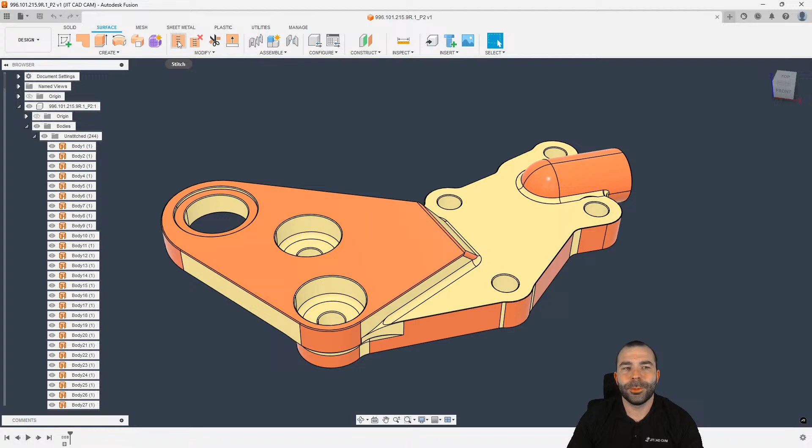Well, what I'm going to do is go up here to the top to my lovely surface environment, and we're going to go ahead and hit stitch. Now, I want to stitch everything in this, so I'm going to grab all of these unstitched surfaces in one shot. I don't spend a lot of time talking about this, but this is a great moment. As you see that green edge, if there was anywhere that was not stitchable, we would see that in red. What that is telling us is, based on a gap tolerance, it is allowing us to automatically go in and stitch those edges together.

To give you an example here, if I go in and let's say we remove this one surface, and now I went in to stitch everything, you're going to notice we're now getting red edges here where it's unstitchable, right? Now, if I was to really increase this tolerance, at some point that would become stitchable, and it could actually ruin our model.

So let's go back. We're going to undo that last thing we just did, because I want to stitch everything up in one shot. Once we hit OK, you're going to notice all those orange surfaces just disappear. And just like that, Fusion has gone through and fixed it to create our watertight model for manufacturing. So let's go ahead and change from here over into manufacturing.

Now, these guys have reached out to me and already declared they're guilty of the number one thing I strive not to do, and that's using 2D roughing strategies. When presented with a part like this, this is something you could do in possibly 3 operations, because you are going to have to put an NPT in here for coolant. But in their case, they actually have a 5-axis machining center. So there's a couple of different ways to think about this: how can I hold this later on? Or, if I was to stay in a 3-axis world, am I going to have to make soft jaws or something of that nature?

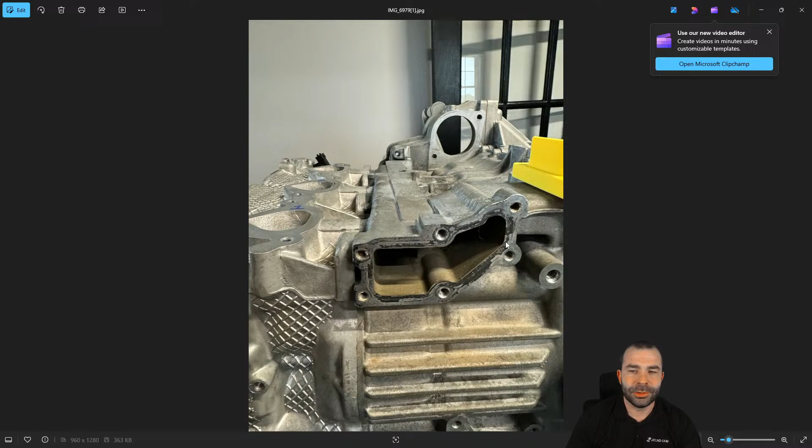Now, me personally, if I had a 5-axis... and so you guys know, I actually have photos of this. I should pull up these photos and give you some reference here. This is the actual location where this plate goes. This original plate is a cast part. It's known for failure because it also holds an alternator on it. What they've done on their end is they've already 3D printed a prototype of this. So now we're transitioning, and this is why I like this whole idea, from that prototype that was 3D printed to let's machine a part, right?

So there's 2 sides of machining when you think about that. One is, do I have to make one of these, or do I make 100 of these? Well, given their circumstances with a 5-axis machine, I'm thinking we might be able to do something with tabs and do this all in one shot. But I'm going to start by throwing some toolpaths at it to get a better understanding of how we could do this. Let's go ahead and create our setup.

In this case, I'm going to set my Z-axis based on a flat. Now, my stock here is coming in very square based on the world coordinates of everything. So by picking my X-axis, if I was to sit square along that edge, automatically my stock is recalculated to a much more manageable shape. So again, we can go to our stock side of things. I'm much more a fan of a fixed size. From there, instead of being offset on center, we're going to offset from the top 20, because I'm going to go in and probably deck this off or clean these flats up.

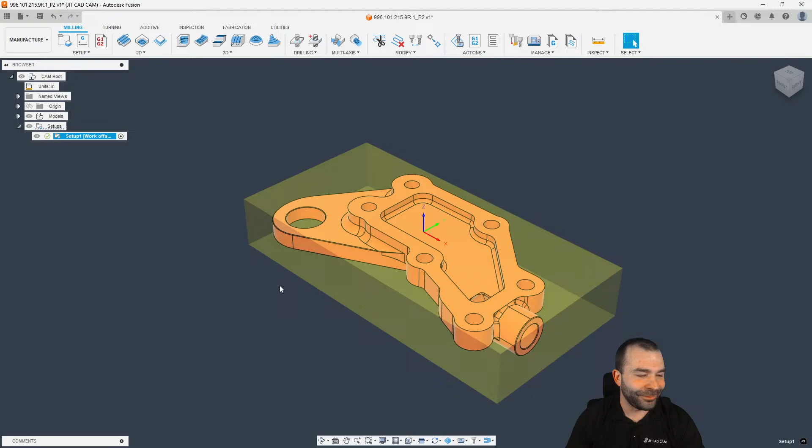So I see Brian out there. I will come back and we'll do some tab work here with a 5th-axis vise by all means, but picture frame using tabs, yeah, we did cover that last week. It was pretty wild, wasn't it?

So as you can see, we have everything set up. Looking at this part, there's actually quite a bit of detail on this side. Maybe I machine it the other way first.

I don't think there's really going to be a right or wrong reason here. But I would tell you, I'm a big fan of 3D roughing strategies, and I think a lot of you are starting to catch on to that. In this part, again, based on my shop crib, you all know this, we're going to go ahead and grab our 1/2-inch flat end mill. We're going for those speeds and feeds that we have. And then from that, we're going to let Fusion basically do its work.

So I'm not going to give this anything until I have to, or adjust anything along the way. And as you're seeing, and this is probably going to be a big shocker to these guys over there, can't wait until I'm out there in February training them up in person, but we can do a lot in a short amount of effort with just one toolpath, right?

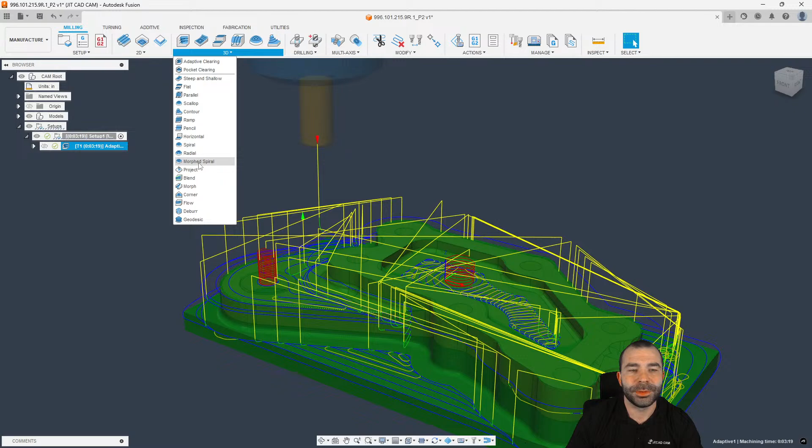Now, I picked a flat end mill because I may want to rough this with a different tool and finish it with a different tool later. But when we start to talk about how do I clean up the floors on something like this, I'm going to go in and use a horizontal toolpath. My favorite thing is to actually finish my floors before I finish my walls. So we're going to leave 25 on the walls, 0 on the floors, and then we're jumping straight into that flat strategy to clean up anywhere on this part that is flat, as you can see.

Now, getting into this a little deeper, we could start to finish up the walls. There's a lot of ways to finish up walls on a part like this. What I'm going to do is either go to 2D. Now, this is where I make that decision. If I don't have critical features, I like to finish things with 3D, right?

3D contour, as you guys are going to see, this is another neat trick. We're going to actually say tool all the way to the outside of the silhouette. And then I can adjust my maximum step down as much or as little as I need. We're going to go ahead and let this just give us a toolpath so we can make changes. Again, the concept here is I'm going to make one of these, or maybe 2 or 3, and I'm going to fit it based on that part. I might have to come back to the design and make a couple of changes.

But awesome. Fun facts. I see you out there. Great to see you coming in from Canada.

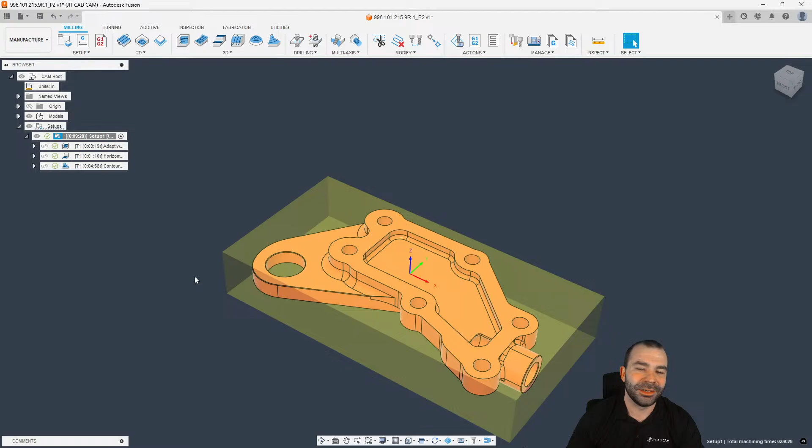Now, that was kind of a cheating way to go about it, but it worked out quite well, right? In the world of machining a prototype or form fitting something, as you're seeing here in our machine time, it's really only going to take me 10 minutes. Am I going to gain anything from saving 2 minutes on the cycle time? Not really. That's why you're seeing tricks where I'm just picking a generic profile to cut something out, and when taking this to production, I may ramp up some of those settings, right?

I could go in and say maximum step down is actually 0.2 instead of 0.05, things of that nature, and clean this up a little bit more. We still have some areas that we may need to make multiple passes at. But the idea is with these toolpaths and the way they recognize our part, we can do things relatively quick. Now, a few other things I may do, because this could be a critical mounting hole.

This is where I like to use the ability to actually say avoid a surface, or go in and actually leave material on this, right? So I'm going to stay away from this wall by 20. We're going to recalculate that toolpath, and as you're going to see now, it's avoiding that surface by 20 thou.

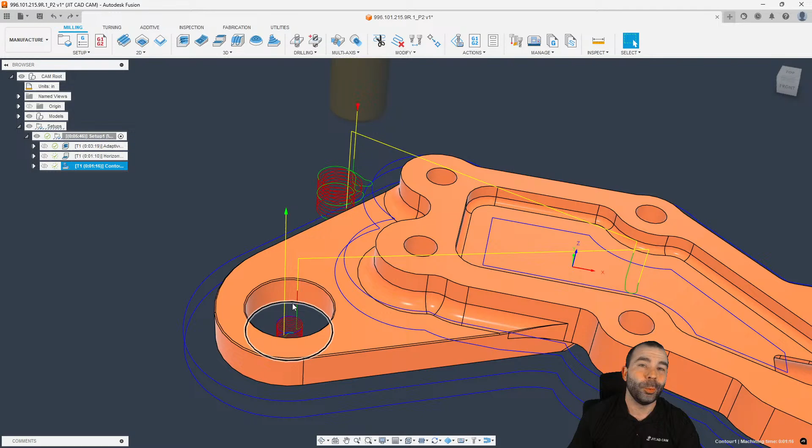I may have typed in something wrong because we've caused a lot of other chaos in our part. Let's go ahead and change that to maybe 0.1, 0.01. And let's undo both of those just to see that maybe I'm not crazy. So as you're seeing, in certain cases we are having dilemmas where that avoid/touch surface is not really fully up to par.

So maybe I would go back on this specific part. Again, we just want to build a prototype. We kind of want to do it quick. I could go into my surface area. We could throw a patch on this. Jumping back into manufacture, we go to our toolpath. In this case, I'm going to use the model feature and add this patch to include the setup model, right?

And I've done a Workflow Wednesday diving into this more, but as you can see, there are still certain workflows in Fusion that work great just to go back, sometimes patch a surface, remove a surface to get to kind of where you want to go, right? And we could do a lot more with this. There's no minimum kind of system here. We could say machine shallows. What machine shallows is going to do for us is add more steps in all these shallow areas, blend in, start to clean up these edges that are actually filleted or chamfered around our part.

So I'm going to go ahead and give that a break here for a moment. I see more and more people getting in here. You guys have any other questions outside of this part? We're just going over this part until one of you asks some great questions, as you always do.

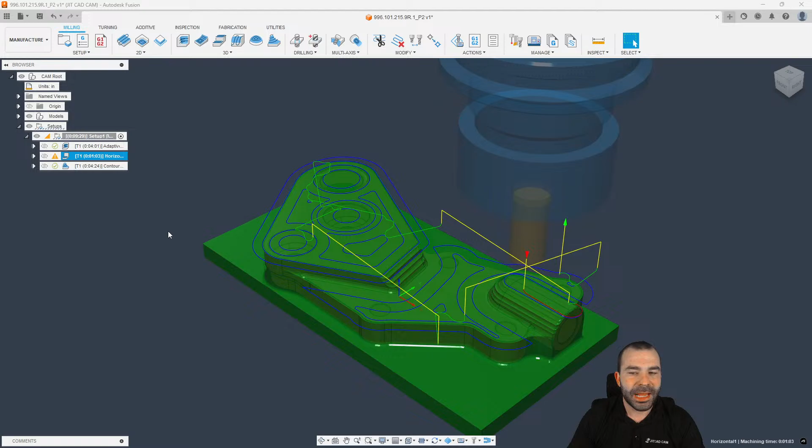So as you guys are seeing here, we've gone ahead, roughed out that part. We've possibly cleaned up our walls. If I wanted to change my strategy overall, maybe I'm thinking, you know what? I want to see what this looks like machining back the other way. This is what I love about the fact that we can quickly go in, flip our Z-axis, and because of how I actually did those strategies with 3D toolpath, I can very quickly go back the opposite way now and see if this is going to be a better approach for everything I'm doing.

Now, keep in mind here, again, we do have some features that I may or may not want to do or avoid. I would still need to go back, possibly add a patch on the backside instead to be able to achieve those tasks and avoid manufacturing in those areas, right? So again, what you're seeing me do is I'm just going to add that patch in. Maybe we want to avoid going down in that specific hole more than that counterbore. But again, function over form. We're not going into production on a part like this. We want to get it good enough so that we can test fit what we're doing.

Now, from here, we could start to pop some holes in this and drill it. As you're going to see here, we're going to go ahead and grab our spot drill as we pretty standard do. There's a 3/8. I think the 3/8 is going to be a little small, or actually it's going to almost work out perfect. I see a lot of people overthink spot drilling for some reason. Since we have a model surface, if I pick that surface, my tool is automatically setting the depth to go into where that surface is.

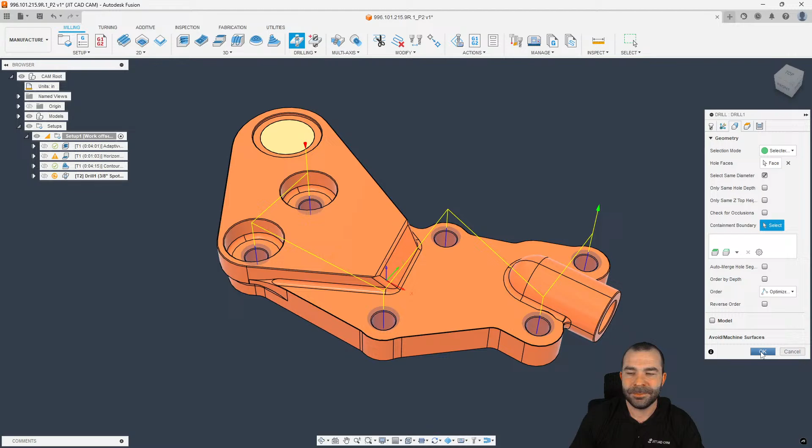So from that, we could do our same diameter, and we could go out and find all of those features. Now, some of you may be recognizing why I kind of finished out these bores, and I'm drilling this on the back end of things versus drilling it in the beginning. I don't think there's a right or wrong. There have been times where I've had to drill the holes in the top of the stock to start with, and then come back and do my machining. But again, the idea is because I lucked out with modeled chamfers, I can just pick that surface and predetermine the depth of that chamfer when spot drilling.

From here, I'm going to show you guys an example of if you don't have a modeled chamfer. So let's do my favorite thing, go in and break a perfectly good model for no reason. And jump back into the manufacture workspace, and we'll just regenerate that spot drill. Now, if you're dealing with a hole that doesn't have a modeled chamfer, you could always add that chamfer in the design workspace. But let's be realistic.

You guys are like me. We're lazy. We're efficient. Just don't ask our wife. Our boss will tell you we're efficient, right?

So this time round, if I was to do drilling with a spot drill, again, I pick my geometry, which is this hole.

Now, there is a setting in here where, instead of saying hole bottom, I could actually go to either a diameter of the chamfer or the width of the chamfer itself. So if I wanted to break the edges on these by 20 thou, first off, you have to type 2, not 1. But as you're seeing me here, I'm typing in 20, and now it's not only going to the right depth, it's doing that with the addition of the tip, going down for that 20 thou chamfer. Again, two completely different ways when you're getting in here and drilling out these holes in these features.

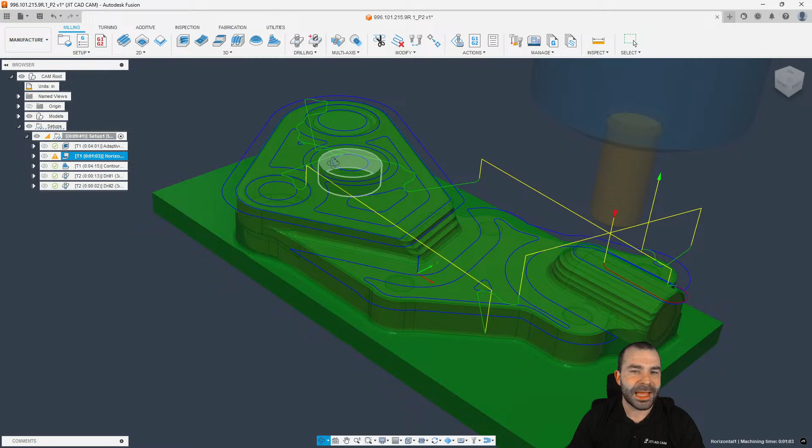So as you can see, we're moving quite along. It's relatively quick and easy to get to this point. We're going to go ahead and regenerate all of this so that the stock model comes through automatically. Let's go ahead and check some of our errors. One or more of the pockets were not machined because they were too small. We could take a glance at that as well. What that's telling us is we're not able to go down and finish these floors in these pockets. So that's another thing that's happening on our model as we're machining, so we need to be aware of that.

Good news is when we go in and do our machine simulation, we should be able to see anything and everything that happens. So again, we're going to go ahead and run our verification. If there's any collisions along the way, we should see those collisions. And as you're seeing, we're machining out all those surfaces, doing all of our blends. Again, one thing that is happening is when we're 3Ding down to actually create these profiles, we're not actually machining them from when we roughed them. So we may want to make a couple of changes there so that we're not slamming that tool in.

And again, something so you guys can keep a note of this on your own: because we didn't have a modeled chamfer, we do get that red edge here where our tool hit the part. But again, that's because we don't have a modeled chamfer, but we are chamfering that edge when spot drilling. So guys, any questions so far on this? Anything in particular you want to see? I don't want to bore you all to death when we go in and flip this part over.

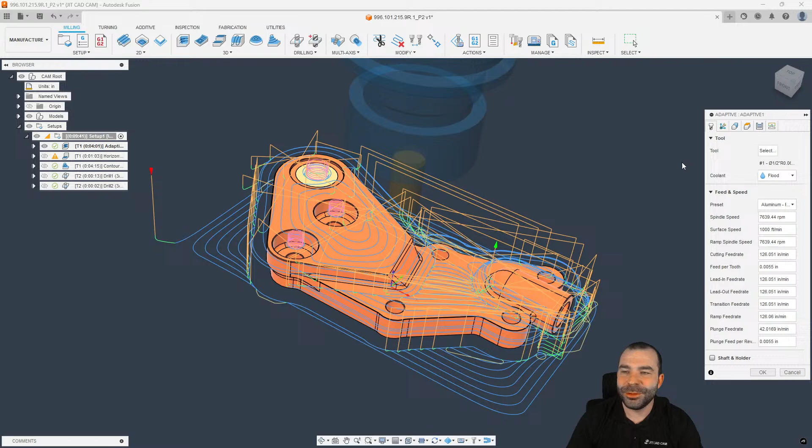But the neat thing is, with the way Fusion works, if you set your tool paths up, as you're seeing, I'm using rest machining from previous operations. So when I needed to flip this part over in the imagination stage, as I call it, right? Customer wants me to quote this. I got to run this later this week. I got a few minutes to play around with it. I'm actually just going to go in and duplicate my first setup. So what you saw me do there is Control D for duplicate. We go in. I'm going to uncheck flip in my Z. And then I'm going to allow this to be from preceding, and I want continuous rest machining checked. What that just did for me is automatically brought through all of the stock from one side to the other.

So if I go in now and I hit regenerate, Control G on my keyboard, for you Mac users out there, I think it's Command G, my roughing strategy is starting to work back the other way, but it's not aware of the stock. So let's fix that. We go into our settings. Now I can define a lot of different ways. The remaining stock should have actually picked up on this. So let's go ahead and see why that didn't do it. I always love when it puts me on blast here. So we machined one way, we're machining back the other way. Let's regenerate that one more time, and we'll take a second glance at it. For those of you that know the problem or you've encountered this, go ahead and put that in chat to get me going.

Would I recommend 3D roughing on a lathe? That's a good question. So it depends on what you're doing. But last week we did cover where most times on a lathe, you're dealing with a patterned profile. And sometimes it's easier to do a 2D roughing on a simple profile. Now, if you gave me a part that was pretty organic and weird shaped, it'd be a completely different story, where I would probably go 3D.

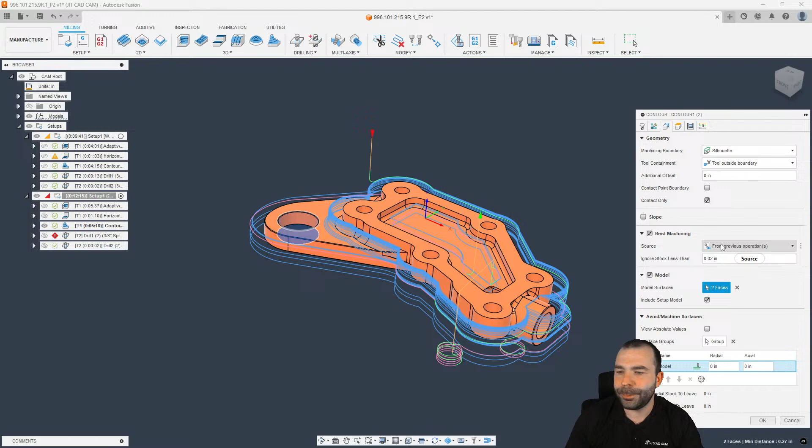And again, we could play around with these tool paths more to see why we're not getting the recognition from one way to the other. Again, I'm going to check this contour out as well. And as we can see in this contour tool path, we don't actually have rest machining turned on. So that is why that contour path isn't coming through. So again, now that we have that contour path turned on, you are starting to see where this is going to go in and machine in areas, but it may be avoiding certain areas because of other settings.

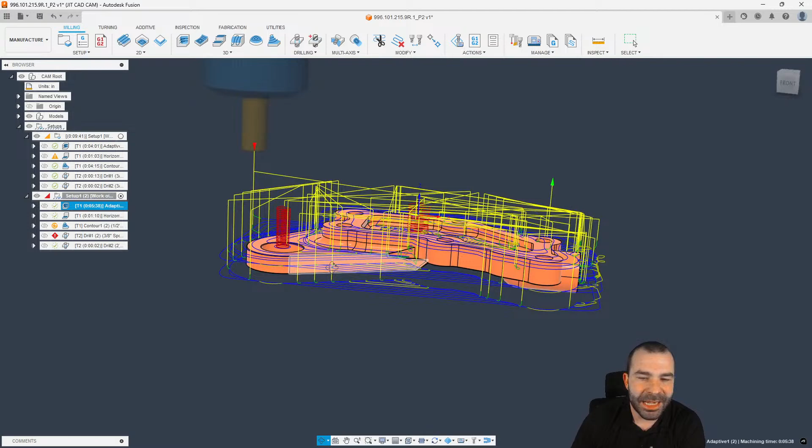Let's go ahead and go back to our adaptive clearing. And as we're kind of encountering, it seems like we almost have a bug happening inside of Fusion. So hopefully Autodesk is catching this in real time as to why this isn't working properly. And what we should be seeing is actually the identification of the material already being removed and only machining where that model is. And for some reason, it keeps going all the way down.

So again, moving a little further on, we'll come back to this here a little later if we're not getting any questions. I spoke too soon on the front side where our back side doesn't have any edges. So again, as this is where we were talking about spot drilling on one side, let's go back into our other spot drill. We're going to go and pick our face, all the same size here. And again, we're adding that 20 thou to break the edge on the backside.

So I see Matt Van Loo down in chat talking about, do you have continuous rest machining? I do have continuous rest machining, 100%. So we went from preceding, continuous rest machining, and then in our adaptive clearing toolpath, we are using no boundary. And with that no boundary, it should be defined by remaining stock. And then from that remaining stock, we should be seeing either from setup stock or from previous operation, but it could also be the reduce air cutting. And let's give that a look here real quick and see if that makes any change.

So on my new setup, I do. So when we go into our setup, I think there's a little bit of a delay. I went ahead and did from preceding and continuous rest machining. Delete it and do it again. Yeah, somebody's telling all my secrets, right?

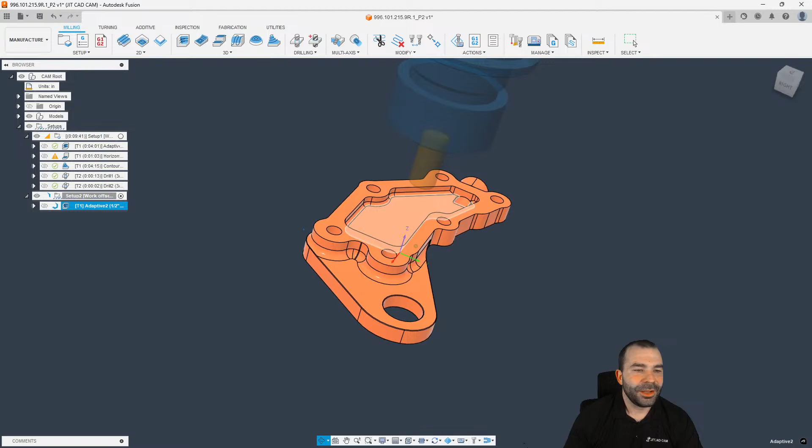I have seen that. So if we go back and we just create a brand new setup, again, we pick our Z-axis, we're going to flip it, we're going to define our X-axis, and then with that, let's go ahead and say from preceding and continuous rest machining. And let's see what happens when we throw that 3D adaptive back in it a second time through, right? Funny if it works. But nope. It's still not recognizing the fact that there is material that is already machined away, right?

Now, one thing we could do is possibly bump up the fact that there is ignore material less than 20. But seeing how we finished the walls in a lot of places, it should actually come through with no problems. So we could increase the tolerance. I don't think the tolerance is going to make a difference on this scenario. I would be curious to say is what happens if we maybe cheat the system and go to pocket clearing and see if there's something in the background that's a little different, right?

So again, we have from previous, and let's just see what we get. We'll throw that same tool at it. Again, not caring about speeds and feeds. What we're caring about is the model recognition. So as you guys can see, I've kind of set you up for failure here, which always makes me laugh. But what's happening is for some reason, and I got this question earlier this week, the adaptive clearing is not recognizing on that flip. Now, again, we're still getting that error, certain pockets not being machined just by this profile.

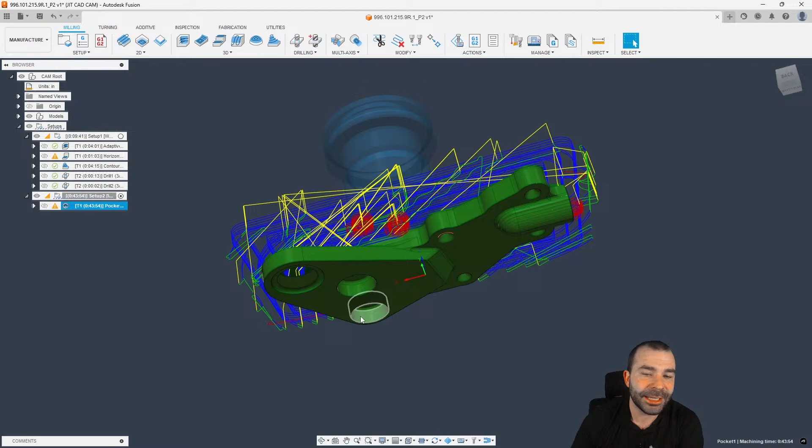But as you can see, based on the actual physical stock model coming through, it actually is now ignoring the lower half of the part that was machined away in the last operations. So again, something just different. Maybe it's me, maybe your Fusion does it too. You never know until you get in here and start playing around with it. Has something possibly happened along the way in the lovely world of updates, right?

So again, if we say remaining stock from previous operations, as you're seeing, we should get the same result as we just got on pocket clearing in 3D, and I don't believe it's coming through. Again, you'll notice it goes all the way down, and just to test this one more time, let's go in and do a derive into pocket clearing, and then I will have to reorder this, so let me drag it up and regenerate it.

This would actually be a pretty good example, because if we are ignoring rest machining here, notice how the 3D adaptive clearing toolpath is still finding things, as funny as it is, right? So it still thinks all the way down to the bottom there's something there.

Any questions so far? I see more and more of you coming and going inside of chat.

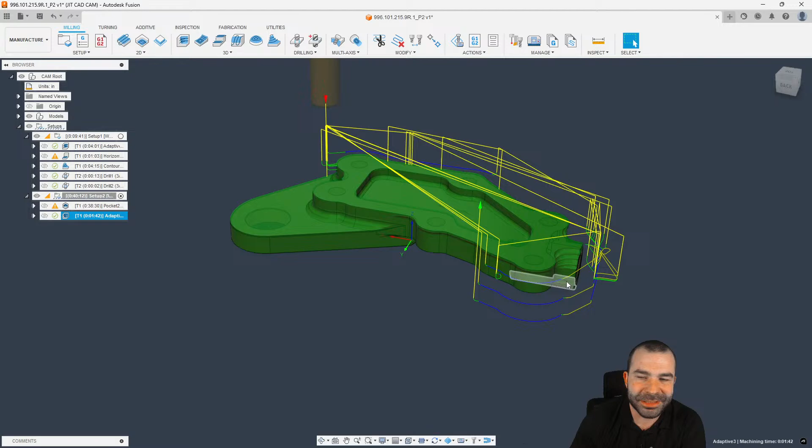So as you can see, there are little hitches inside of Fusion. Again, you could go in, possibly ignore stock less than 30. Again, we roughed everything out to 20. Increasing the amount of stock to ignore actually helps a lot with getting rid of a lot of whisker lines. But I believe this is just a random bug that we're seeing nowadays. So again, pocket clearing in this case went through and actually fixed everything for us and ignored where that stock was. Not the most ideal thing in most situations, but still achievable, right?

So from that, we could go ahead and continue with what we were doing. Let's go ahead and snatch up the other two toolpaths. We'll repost those down below. And again, we'll regenerate those on that flip.

So Roy, you get a lot of empty moves while using adaptive toolpaths. I've seen that a lot too. And usually the best way to look at it is increasing that stock to be ignored has a tendency to actually change a lot of what you're seeing. Me personally, I see it when I go from like a 1/2-inch cutter to a 1/4-inch cutter. It seems like there's something in the STL model that's being generated in the background for your stock model that it thinks there's more material, or it's starting to see the steps, and then you can avoid that now.

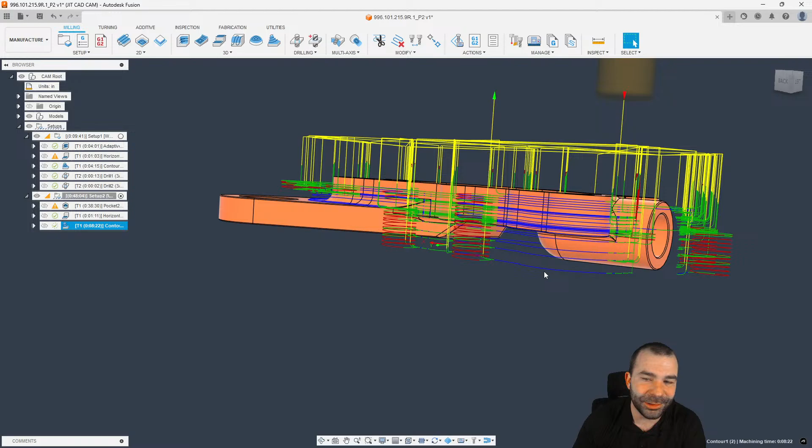Now, there are another couple secret areas that we'll look at here in a second, but as you can see, we're coming back with that horizontal toolpath. Again, we have a lot going on in that contour toolpath. So if we go into our contour toolpath, yours truly forgot to turn on rest machining. And now we should see a lot less at the contour toolpath. Again, we're still, for some reason, at this end of the part, going down past the part, even though we've actually machined that all away.

Now, something that some people don't know exists is you can go in and do a compare and edit across multiple toolpaths in one shot. I did a video on this. It's super cool to be able to come in and actually look at your preset speeds and feeds. If I wanted to, I could go in and now for the pocket, we do aluminum roughing, and then the horizontal is going to be aluminum finishing. Granted, you do have to set up your tool speeds and feeds at your tool level. But there are additional things in here.

This actually gives you access to certain areas that are almost hidden in the background. You have things like chaining tolerance, which is a night and day difference from toolpath tolerance. And we could actually search tolerance here. You're going to notice there's a lot more here than a lot of people think. So you could go through and have additional secret settings in here. Surface triangulation tolerance is one that I would love to point out. You can actually modify your toolpath much more than what you're seeing at the highest level.

Now, some of these are built off an expression, so just know this is half of whatever your tolerance is set to and things of that nature. But your actual surface triangulation tolerance is, for those of you that don't know, surfaces are actually built out of triangles.

So now you're adjusting the tolerance against that triangle, which is the physical model of what you're working with. But again, another pro tip for a lot of you guys out there: you have that ability to go in and do this on your Fusion, adjust it down more. You can actually change how fast your toolpath calculates there or how accurate your toolpath is calculating.

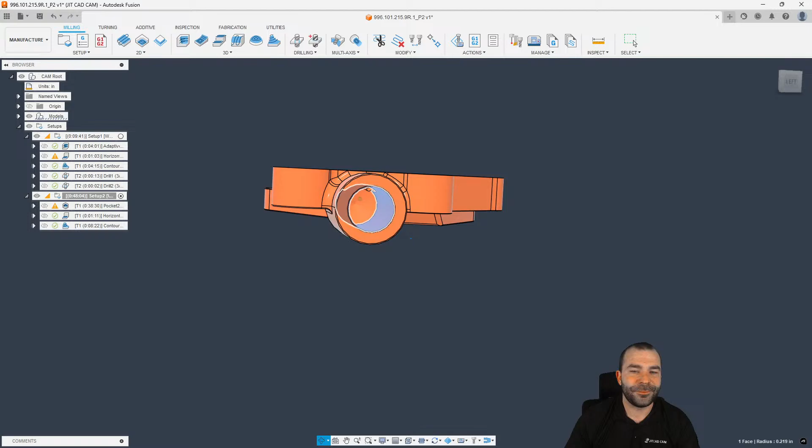So what I'm going to do is I'm actually going to jump back to design here. Now, I don't have the exact data in front of me, but as you guys can see, this is a 438 diameter hole. It is a diameter cylinder. It's not a cone. If I was to NPT this, I would probably go in and add my draft to the surface. Again, that draft allows you to set an angle. In this case, I'm just throwing 1 degree at it. And I think you all can see out there that that is now a tapered shaft.

Or if I go to 2 degrees, 2 degrees is overkill and it starts to break the model. But with that angle for my taper, when I do my thread milling now, it will actually chase that taper. And we'll see that in the toolpath. Let's jump back to manufacture. Again, I'm going to actually do this based on a thread toolpath. We're going to do tool orientation.

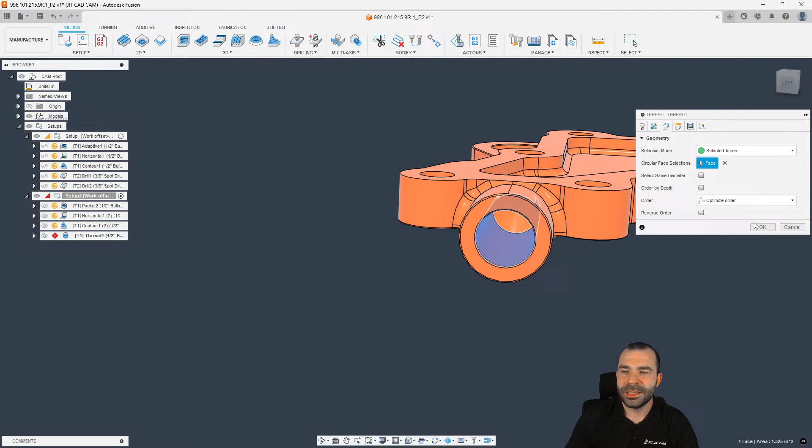Again, later on, we're going to talk about putting this on a 5-axis, right? So we're going to go ahead and define our Z this way. Again, our X-axis won't actually matter. If you're on a 4th axis, it can. Usually your post-processor takes care of that all for you. But now what you're seeing me do is select my circular face. Of course, yours truly is going to make the mistake of not having a proper tool to do this. So let's go ahead and select the tool, or I'm just going to make a tool. Let's go ahead and find our thread mill tooling.

I am blind as a bat today. It is Friday. I'm already looking towards the weekend.

So there's our thread mill. Thread mill diameter. Let's go ahead and change that down to 0.3 just to make sure it fits inside the hole. Again, you have your number of teeth, your angle, and what your thread pitch is. So go ahead and hit accept, select that tool. And now if we look at this straight on, you will now see that that taper is happening as we run down that cylinder, right? So now we're getting that cone profile.

Yes, we're going all the way to the bottom of the surface. We could change that. We could say full top minus whatever that distance is, maybe 0.5, creating that NPT thread. I'm going to pause there because I see John has a question in chat. I have a surface made in a part that is the shape of NPT threads I use, and then I drag them into an assembly. Yeah, you're not wrong on that statement at all. You could 100% create a surface and make basically a hot fix to place that surface.

Yep, so it looks like confirmed. It's not just me, and I know it's not just me because of the great world of you all working with yours truly over here and seeing this content; somebody on Monday was pointing out that it wasn't doing what it was supposed to do. So I always ask, is it one person or is it all of us? And it is definitely all of us having this bug and issue with the adaptive clearing not recognizing the stock. Now, Autodesk, if you're out there watching this video, whether it be later or right now, feel free to put in chat or leave a comment if there is a fix or if this isn't on your radar.

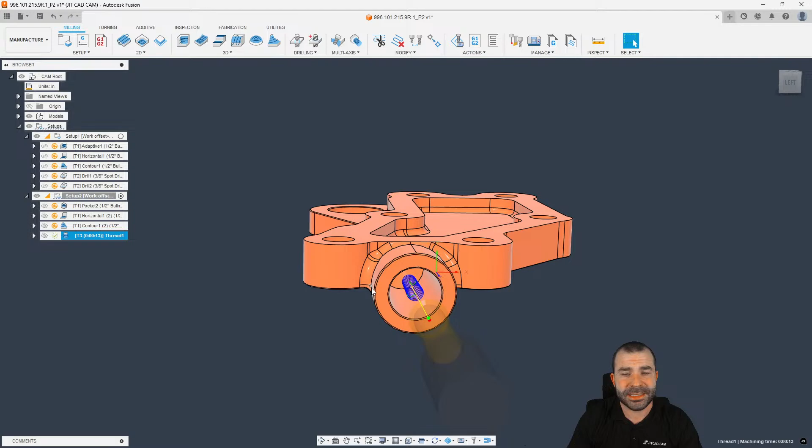So as you can see, NPT threads are completely doable. Another thing most people don't recognize is usually you would probably drill and ream that angle in there, but who's going to go out and spend a couple hundred dollars on a reamer, right? So we could go in and we could actually 2D bore tapered holes as well. Some people forget about that feature inside of Fusion.

Again, I'm going to go for Old Faithful here. That is going to be way too big, and we're going to have to switch out Old Faithful for a smaller tool. So let's go see what I have in my shop crib laying around to make more problems happen. There we go. We got a 1/4 inch end mill. Again, perfect world, we're going to use aluminum.

We're going to define our tool orientation. Again, I can pick my Z axis. We now define our face selection. And as you can see, we could actually bore down into that, again creating that cone-shaped surface. Once again, you have your angle, all of that stuff.

I would recommend if you're going to do this, we're going to go ahead and turn on wear. So the first time you go through and you bore it out, you may need to check it and see if it's proper for that NPT to work out.

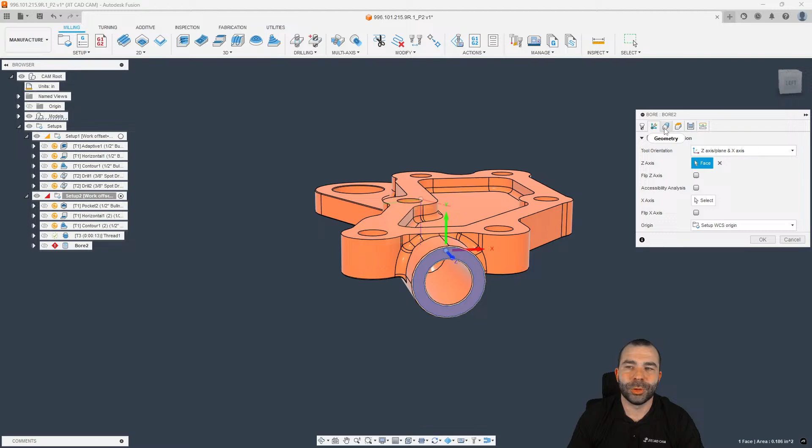Now, if you're like me, you always look for the most efficient way to do stuff, right? As you saw, I had to make a lot of mouse clicks, even though I already had one part of this done, whether I was doing the thread or the bore first. This is something I even forget nowadays: the fact that you could quickly jump from one toolpath to another, bringing through your tool orientation, bringing through certain selections, and automatically defining that across two different toolpaths.

So what this is prompting me for is now, hey, I have yet to bore that out. So it said you can't bore with a thread mill, give you a new tool. But as you can see, by placing one before the other and using one with all of its selections.

So I got a few more questions coming into chat right now. I have a similar part and typically set up two adaptives for the second op, one from the top to just under the first operation, remaining bulk. Yep, I've done that before. I call that kind of like the cheeseburger or the sandwich method, where you got bread one way, bread the other way, and then you can meet in the middle and overlap the two.

So it's been that way as long as you can recall. Well, good thing we're seeing this live and now it's documented. So Autodesk, if you see that, John out there says it's been there forever. You guys need to come in and do something about it, right?

So let's go ahead and change gears here. I'm going to pause, though, because I see another one. Is there a way to change pre-drill feed rates other than manually in the G-code? I would need a little more information as to what you're requesting from a pre-drill feed rate. Are you looking for a slowed down feed rate prior to entering a hole, or are you looking for your end mill actually slowing down and plunging into a part?

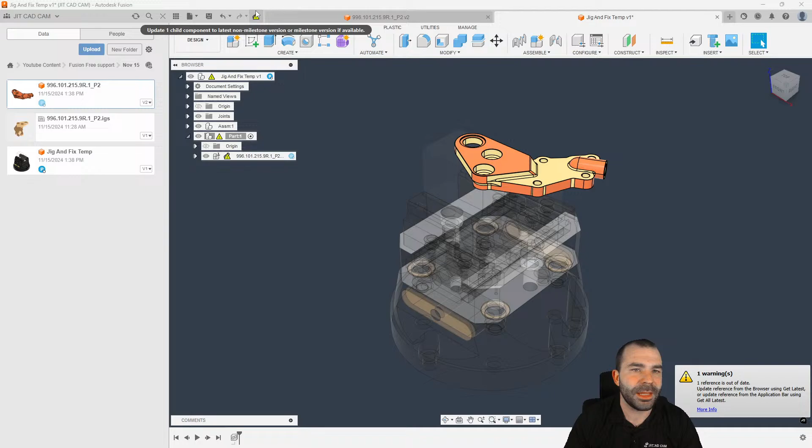So as we're going to see now, we're going to get that warning because our part is linked back to the original design, and we need to bring that latest and greatest through. And I see another statement coming through. When using multiple passes, multiple tooth thread mill, it will rapid above the part every pass and not stay down in the hole in between each pass. I believe that is a question or a statement. Let's go ahead and take a look.

So again, we're doing our threading. I'm going to go in and say we're going to do either multiple threads, or we can go through and set up multiple passes. And from what I'm hearing, it sounds like it rapids all the way up and out. So let's simulate this and see if we can catch it here before I have to go look at the G code, right? So we're threading out. Go ahead and make our stock a little more transparent. Yep. So it is rapiding back up and out and then coming back into the bottom.

And the reason for that is, let's go ahead and look at our heights tab. So in my heights tab, we are starting from a retract height, right? So we do have a clearance height versus a retract height. Now, because of the way my stock is, we're staying 200 above the highest point, which would be my stock in this occasion. So if I wanted to adjust that, we could, and you could set that to whatever you need it to. So I could actually say this is from a selected surface and go in and define that surface, and now we should shrink that up even more.

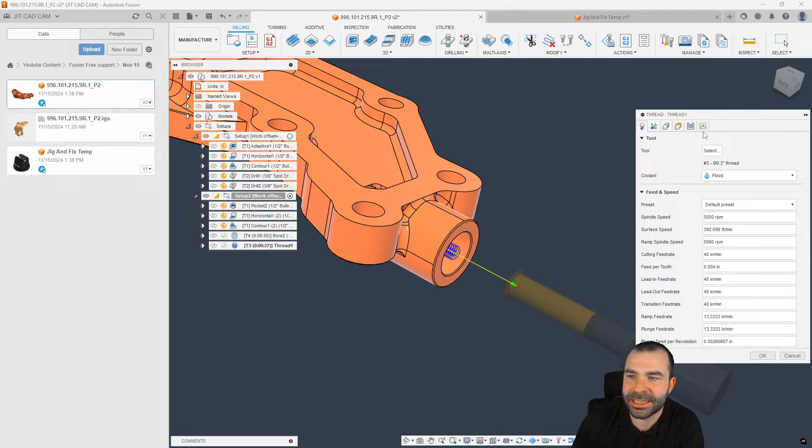Now, there are additional settings outside of that in your linking tab that can also affect the problems you're having. I've seen that in some cases where you start too high, you don't start high enough, leads to center, things like that. Awesome. Multi-tooth thread mill. Yep. So with a multi-tooth thread mill, you're probably still going to get that same result, right? So if I went in and edit my thread mill, and let's say we have, I don't know, 5 teeth on this one. Same kind of concept is going to happen. It's still basing all that information the same.

So we got our jig and our fixture. We've talked about doing this based on 5-axis. Now, everybody was asking about, let's do tabs, right? We did tabs last week. Why not do tabs again this week? So in the world of 5-axis, we really wouldn't care if this actual NPT fitting sat square to the end of our part. Now, I could do some Hollywood magic of doing a joint based on that cylinder face and getting rotated over, of course, standing it up, and then trying to get it placed wherever I need it, right?

Now, as you're seeing, the goal of that stock in the background is nothing more than an idea of where that stock is centered on my part, right? It's undersized, but as you can see, I can actually get very close to placing it. The problem we're going to face here in a minute is because we've actually fixed the part off this end, if I was to now oversize this stock, we can go to, let's say 3. Actually, we're going to have to go up to possibly 4. And then our length is going to be closer to 6. Now notice how that part has shifted out the end, because again, we told it from this end a certain distance, right?

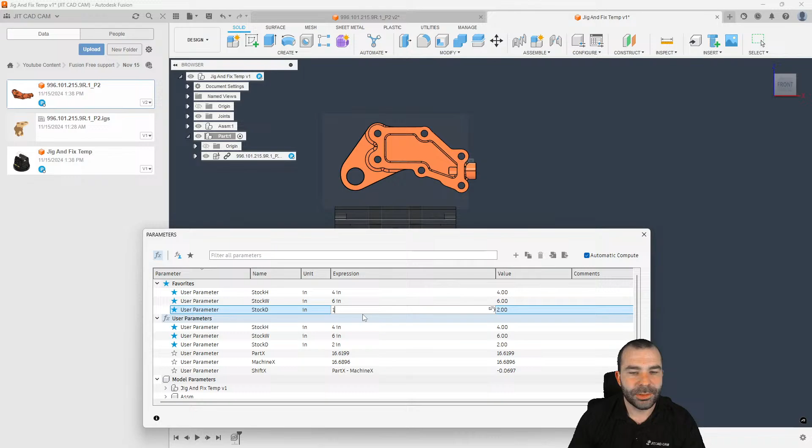So again, I'm going to go and try to narrow this down so that it actually fits within that stock size. So now with that stock size being defined, I need to change how we did that joint, right? So as you can see, we could actually activate everything as a whole. I have that joint down in my timeline. If I wanted to bring my part back in, I could do so.

Another thing I could have done when we set up that joint is I could have placed it against this flat over here. Again, redefining based on the bottom center of this surface. Now it's a little tricky to see, but usually you get a rectangle, which is that rectangle center of that surface. Again, fully editable and changeable based on where you're trying to go with it.

So now we could bring it in. I also could have, instead of bringing it in, done a flip. Again, rotating it and placing it. A little more of a manual process at the end of the day, but I think it gets a little bit more of a nicer output for what you're trying for. Again, we're going to do some tabs here, so I'm going to bring this up as high as possible. And now that will allow us all the room to place our tabs.

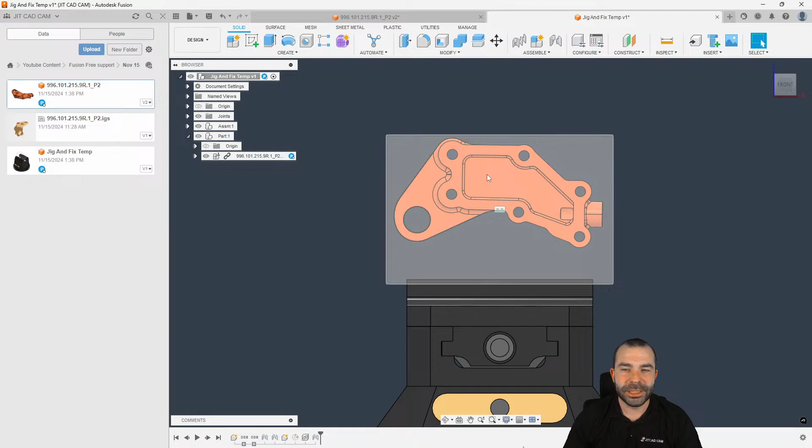Again, the orientation of the part isn't the most important thing right now. What we're really going for is how are we going to machine this and hold on to it, right? So when it comes to tabs, in my opinion, I like to actually just create a sketch against my stock. And then from that, I usually just use nothing more than a couple of rectangles. Now, since the addition of fixture recognition, we used to actually have to concern ourselves with possibly dropping a rectangle down here and almost making like a trophy base.

We no longer need to do that in the world of Fusion because I can now actually just model up my tab and I'm just going to overlap it a little bit on my part and a little bit in my jig, knowing we're going to stay clear of that. So again, what I'm going to do is two-sided. What that allows me to do is bring the first one in and get it placed however deep I need it. And then from there, we're going to go ahead and bring in that second one.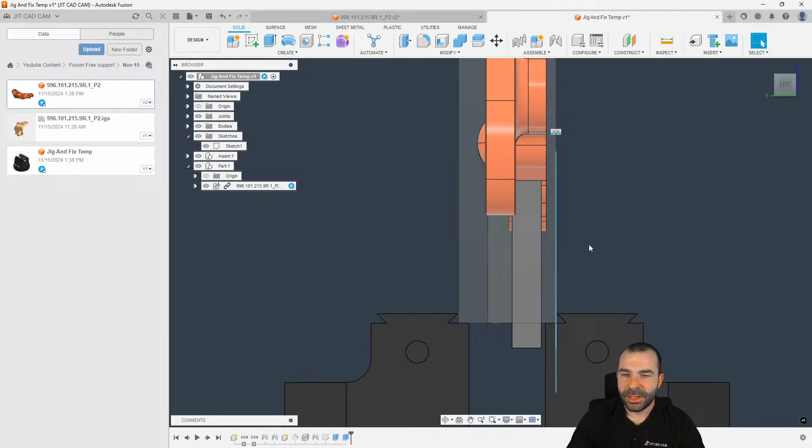So again, we have our second tab, new body. I think I failed to do new body on that first one, so let's go ahead and add in that new body. And now you can see we have our two tabs sitting in our part with that ability to go in and machine them. Did it give us a new body or is it being difficult today? Let's see here. Let's go ahead and delete that one and just recreate it. Can't be perfect all the time, right?

Again, two-sided. Go ahead and drag that in. Drag this one back. Hopefully this time we remember to say new body. There we go. There's my two tabs. My two tabs are sitting in my part. They're also low enough now. They're down in my jig and fixture.

So if I went back to manufacture, again, working off our setup here, I'm going to delete this setup because we're going to start from scratch. We did end up with our actual patches floating out in space. And what I'm going to do is create our setup. Again, I'm going to walk through my process, right? So Z-axis up, X-axis along my part.

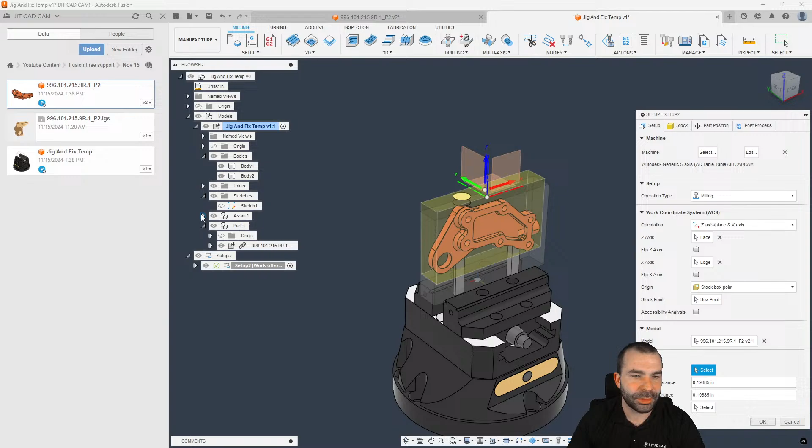My actual model for manufacturing, we're going to go back into our design tree. We're going to make sure that we grab our model. Now, our fixture, this is very important because we want to bring our fixture and everything through as well. So we can go back in now and pick out our fixture and all of our fixture settings.

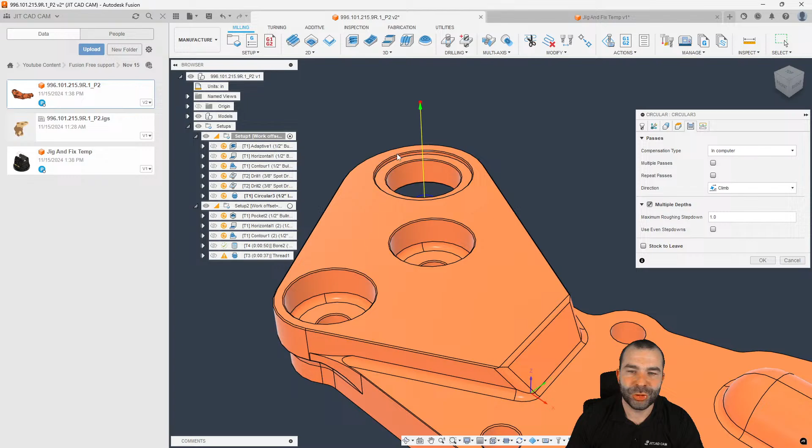But let's say I do circle toolpath. And again, we'll go for my favorite tool, as you guys know. And now what I'm going to do is we're going to lead to center. And then I'm going to pick my hole. And now based on your step downs, again, we're going to do the math from hole top to hole bottom. So maybe I only want to make one pass, right? So I could set my step down very dramatic, pausing that one step down in center and then leading out and around to clean that up.

Now, if you wanted a different feed rate for this, this is the great thing about actually having a custom feed rate for this situation, because you could change your plunge and your lead in, lead out feed rate to accommodate that, right? So if we changed our plunge rate to maybe 50 here, what we can see is setting that up to plunge down in the center based on the plunge feed rate. So that would be a different way you could approach that scenario.

So I see another question coming in from Deep Thinker. I have a question on that NPT thread. You have just a straight drill hole on the model during programming. Do you have that hole tapered? Yeah, so you may have missed it, as I actually applied a taper to that hole.

So I changed the surface to be a tapered surface and make it easier so that when I go in, and as you're seeing, we really wouldn't need to pre-drill it because we bored it now, but you should see in that actual bore toolpath, it's starting to cone and fan. And we would 3D that unless you spent the $500 on the reamer to do so. And then my actual ability to do my threading cycle was going to chase after that, right?

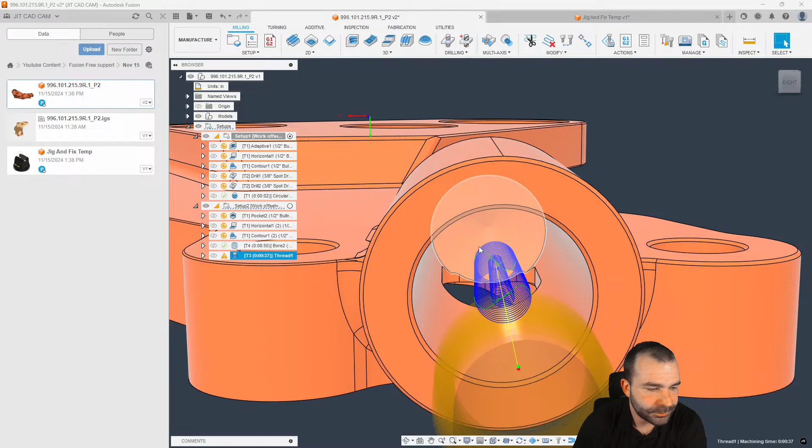So again, getting back to jigs and fixtures, we go ahead and have our part all set up, ready to go. I failed to actually add in to that part. So we do need to, either at the model level or at the fixture level would be better, add our tabs. So let's add our 2 tabs in. Now, you need to make the decision when you're doing something like this, because of our fixture avoidance, do I want to machine the tab as if it's the part and take them to 0, or do I want to stay away from them a distance, right? And you'll see that here.

So if I was to go back when we first machined this, I'm going to go ahead and grab my pocket clearing, and we're going to paste that in. And now I am going to edit pocket clearing because I want to do tool orientation in this case. Again, my Z-axis is this way. And now what you're going to see is based on that actual toolpath, we have what's called fixture clearance. Now, the problem is the measurement of fixture clearance can cause a lot of problems, right?

So what I need to do is make sure that, one, when I evaluate setting up my fixture, how much am I comfortable with my tool getting near that, right? So from a radial standpoint, I don't want to get within 50. Now, axial, you may actually want to say you can get closer. I usually match the two unless there's a special occasion.

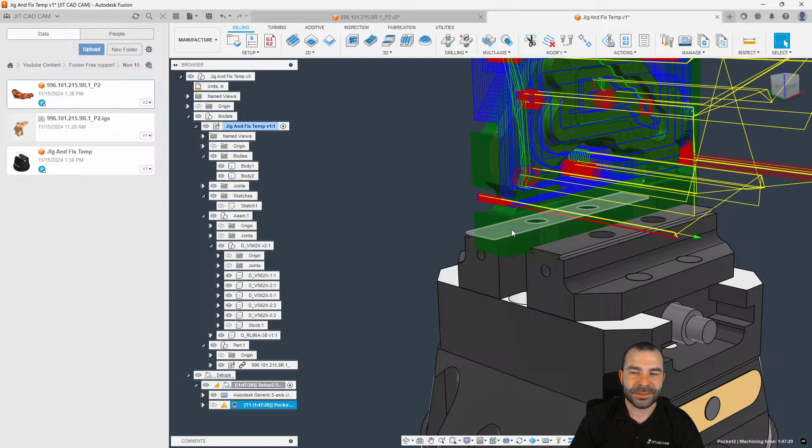But as you can see here, when we look at that tool path once it's regenerated, we are now machining much more down and under that part as much as we can, right? And this is something that everybody is going to have to play with to find out what is going to work best for them to make sure that they aren't getting close. Now, some of you are probably still wondering, why isn't this getting close to that part or in here fully? Well, I would need to edit my tool because my tool does not stick out far enough to do so.

So we're going to auto detect tool length. You're going to see it pull out a little bit more. Now, auto detect tool length only thinks in the world of the part, not the fixture. So again, we could go back, edit that tool. We're going to go ahead and give that a dramatic length that I would never machine with, but I think a lot of you can get the bigger picture now, right? So again, say that sticks out 4 inches. That should give us much more clearance based on our regeneration.

So I do see a question come through from Deep Thinker. Do you have to have it tapered? Surprisingly enough, yes, you do have to have it tapered because when you're thread milling an NPT tap, you can't actually set an angle to the actual threading cycle, right? So you can't create that. It needs the surface to drive it.

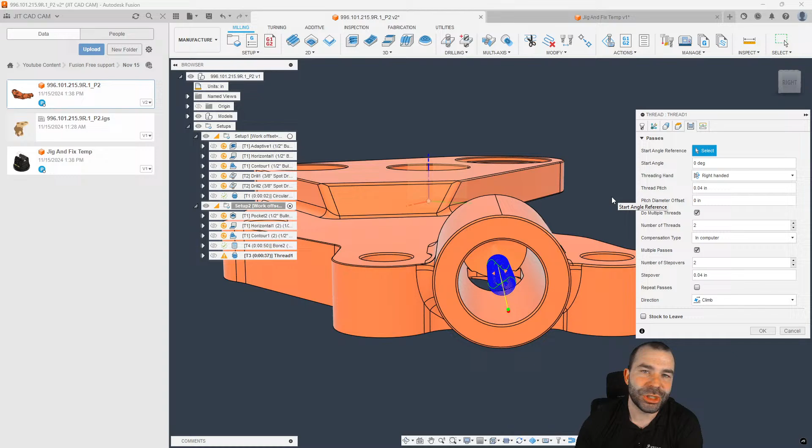Correct. So John is correct. So if you're using an NPT thread mill, and that thread mill is basically 1 inch worth of threads, you could just do a single swipe around. Now, I would model that hole as your minimum thread diameter. So then you could actually use your pitch diameter offset to bump it out to wherever you need it.

So again, getting back to jigs and fixtures here, let's go ahead and take a look at our tool path. We should be getting much more underneath that part. Again, I still don't have that tool quite fully stuck out enough to avoid our jig and fixture. So we would have to edit that some more. Go ahead and turn off shaft and holder. Go in and edit that tool. Again, not the most realistic things, as you're seeing me force this tool to go in and do what it doesn't want to do.

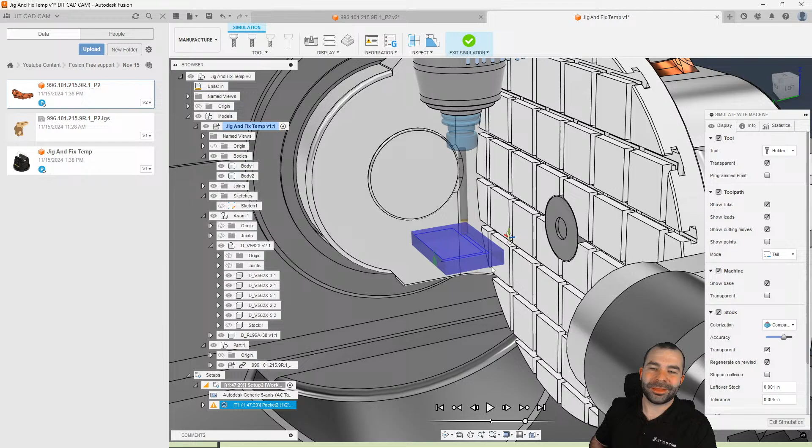I'm going to cause a pause here because we are coming up at the top of the hour. Why do you think no matter what I change, that tool path was not going further and further down? And I can give you another view of this. If we look at this tool path a little more straight on here, we'll get you a full view of it. We were trying to get this tool path to get further and further down under our part. Now, why is it, do you think that is? Give you guys a moment to think about it.

In the meantime, I'm going to go ahead and glance over at Discord, check in a few other places to make sure nobody's putting in tickets behind my back here. One of you all just texted me a lovely picture of yours truly for some reason. I know exactly who it is. It's another engine manufacturer. But let's take a look at Discord.

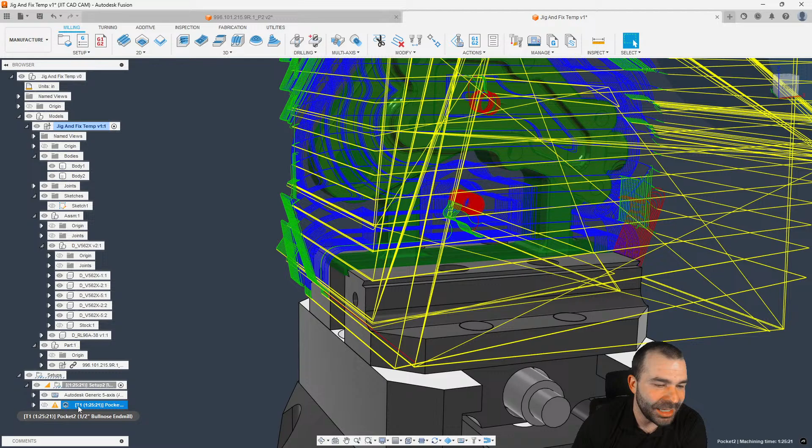So again, we could go back and change some things. A nice thing about the new collision avoidance here, I like, is we could actually go in and define staying away from our fixture surface in addition, right? So if you all didn't know this, if we go to the fixture and we actually create a fixture avoidance, it pulls our fixture through automatically.

Now, if I was to put in another 50 here, you're going to see the math roll up down below. So now it's thinking to add that 50 to our 50 in our setup, right? So again, this is something neat. A lot of people don't really see it because they haven't dug too far into it, but we can add additional fixture avoidance at a toolpath level, not just the setup level, right?

Same rules would apply if I was machining a part like this and I wanted to get it to tabs. One thing I might actually do, and this is something a lot of people are always curious about. We defined the tabs themselves as part of the fixture. I may not, right? And we did talk about making the tabs a part of the model so that you could machine the tab as close to the model specification so that it's easier to deal with later.

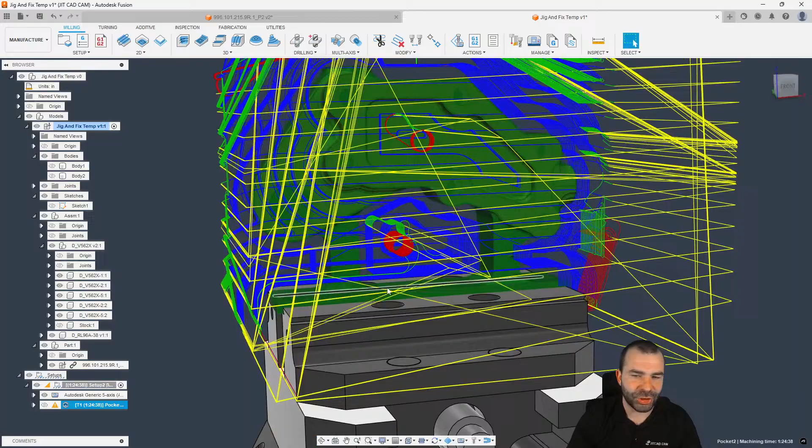Now, again, I've removed the tabs, but based on my pocket clearing scenario, this is where I could use model again at the toolpath level instead. So if we went in at just this toolpath and added our tabs, it's going to machine them technically within 20 because we have stock to leave of 20, and then do our avoidance of our fixture as we've rolled up. So there's no right or wrong there when you're doing something like this.

I always like to think in like a global setting, right? So this is global. Globally, what am I trying to achieve? And that's why I've stopped adding my tabs here in the model, because my global move is to machine the part, right? Same with my fixture.

Now, those tabs later, if they're part of the fixture, can cause problems if I was to do my 2D contour, and then we do our tool orientation, Z-axis this way, and let's say I was actually going to split those off, so we're just going to pick one little edge here and roughly here, and now I need to cut those tabs off at some point, right? Now, keep in mind, yes, I know we're hitting our part, guys, I get it. I'm the master of ruining the part.

So now if we were to simulate that, but those were a part of our fixture, we can cause problems in simulation, right? So there's our toolpath. If we simulate this, of course, we're going to get a collision against our part, but we will also get collisions against our tabs as well. And we're seeing that down here in our collision tree, right? And we can view those issues, fixture/cutter collision, right?

So again, something different for you guys to think about at the end of the day and how that is going to affect what you're doing. Any questions in the meantime while I clean this up and get it to work a little bit better?

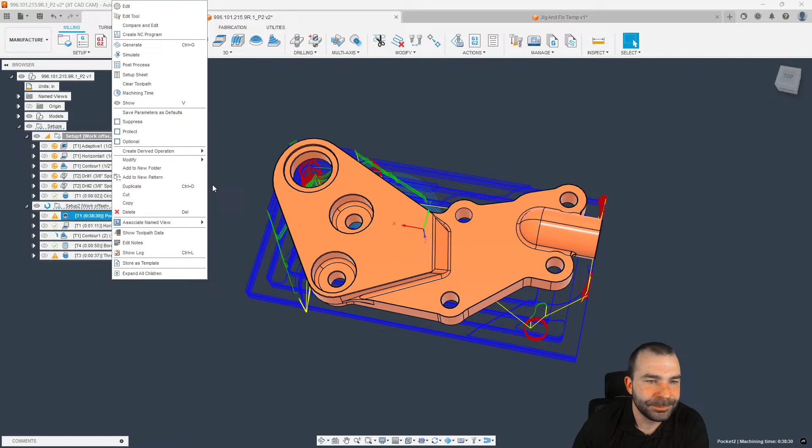Hopefully that explains NPT threads quite well. Bodzanova was correct in the idea that the machining boundary was the issue. Which makes me think, what happens if we come back to our original setup, see if we can't force something out of adaptive clearing to work the way we want it to. So again, we're going to go in doing a derive, and we're going to grab that and rotate that back up to the top.

What do I think about Cloud NC? I don't know. I think it's interesting. I do. Not just Cloud NC, there's also several other ones out there. I follow along with them, and I like the idea of automating programming to an extent. I just think a lot of you guys out there probably still drive carbureted cars because you're like me and enjoy the analog approach, right?

So let's go ahead and take a look at this adaptive clearing. And first off, we need a tool path. And with that, let's make a couple of adjustments. Let's actually give this a selected boundary without selecting anything. I've seen that actually make a pretty big difference as well on something.

So I see perhaps a future video or tips on using a 3-axis machining center as a lathe for small collet holders. I've seen a lot of people do that, and I've done that in the past, and there are some tips and tricks about it, but usually the best way I can tell people is you're hacking up the actual G code when it's posted to make something like that happen.

Seeing how you really don't have a tool changer or a parts catcher, or if you're really in a tight spot to do something like that, it's not a bad way to go. But I know a lot of shops that would love to make one-offs for almost less than what it's going to cost you to do it and fight with the machine to make it happen.

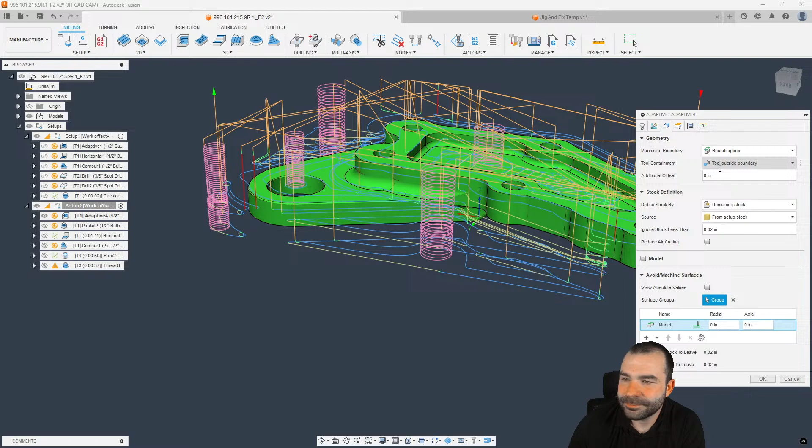How's everybody's week been otherwise?

You know what could be causing this? Let's go ahead and see if we can't get that stock model regenerated.

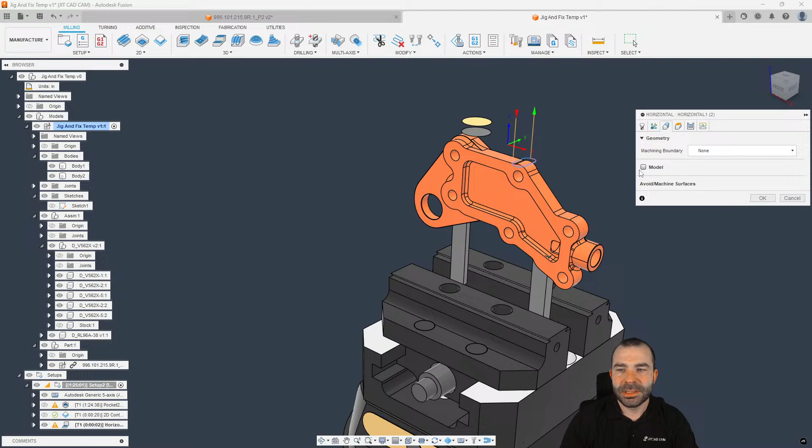So we could go to our tool orientation, pick my Z-axis, again, bringing that information from one file into the other if you have something pre-programmed, right? So this is a way you could easily program your first part and then recycle all those tool paths again and reprogram in the next part.

Now, the idea of the container method, if you guys haven't seen this, would be to start a blank file. And as you saw me do on my jig and fixture, I would have a component that would just be part, right? Now, anything that goes into this component would be what's programmed. And how that works is if we jump over to manufacture, I am creating a setup before I actually machine that part. So again, we could go in and we could say it's from solid.

If you're going to work with different sized materials, you could define those materials. The real trick is that your model is going to be driven by whatever's in that part component, right? So now you're seeing a lot of my information askew, which is causing a problem here because we haven't really given it anything. So we'll go to relative size box.

But if I was to apply a couple of toolpaths, let's just throw a template at this to speed the thing up. We're going to go in and do my 3-axis milling. Again, face, rough, finish. But now at the design level, if I was to bring in a part that I wanted to manufacture, here's that part. And we'll actually leave this outside of the component. So here's one part I want to manufacture.

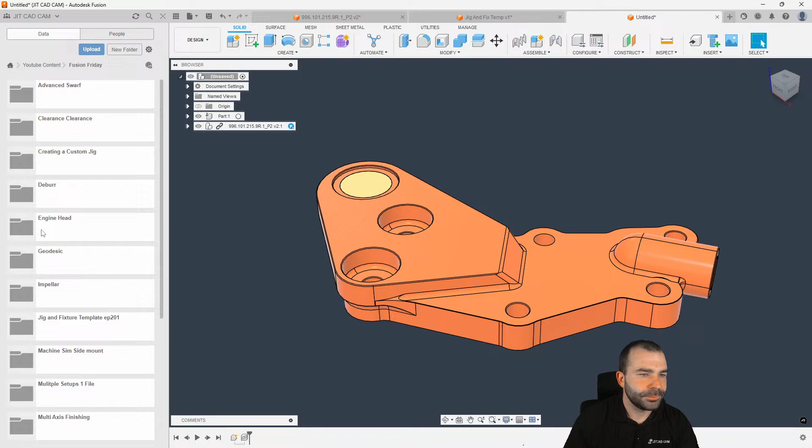And then what I would like to do is go back and see if I can't find a second part. Where do we have it? I think it's over in my Milling Monday. So here is now another part I would like to manufacture. And then I think at some point I have a third part. So give me a quick second here. I'm trying to remember where I put that last part.

Either way, the idea is still the same, that I'm now going to take my part and place it inside that other component, causing on the manufacture side of things for everything to regenerate and re-setup, right? But as you're seeing here, that new setup is coming through. We've gone in and programmed our part. For some reason, we are having a little bit of craziness, so let's go back to our design.

There is our part. And my Fusion is all of a sudden getting quite wild with different things. So let's see what should be coming through. My syncing is not working automatically, but as you can see, all of that stuff is machining in real time, right? So when I go back to re-edit this part, we go back to design, and now I'm going to say, let's take this part out. Let's put our other part in. Again, let's pull this one out back under the top.

And when we go back to manufacture, we're going to see here a regeneration. And again, by activating that setup, it's now changed my tool path to this part. So it's a quicker approach if you're working with a family of parts. You can kind of just drag and drop them and they automatically go through and set up and define what's going on for you.

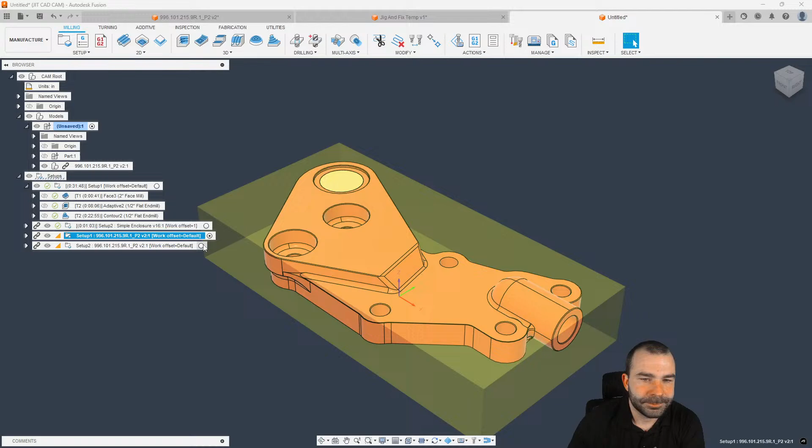Any questions outside of that? Hopefully that answers your question, Roy, as to what you're seeing happening and how that's working. Did we lose you? Anybody else have any questions before I go back and start looking at some other things going on?

So the post-processor actually defines whether or not your probe wear is adjusted. Again, it depends on your machine controller too, because it realistically is going to be based on radial. Now, your tool diameter or radial wear would also affect that, right? So obviously one is ×2 and one is the whole integer. Now that can be adjusted in the post-processor to define whether it's radial or diameter adjustments.

I did just notice something in Fusion I need to check out here real quick. Give me a quick second, guys.

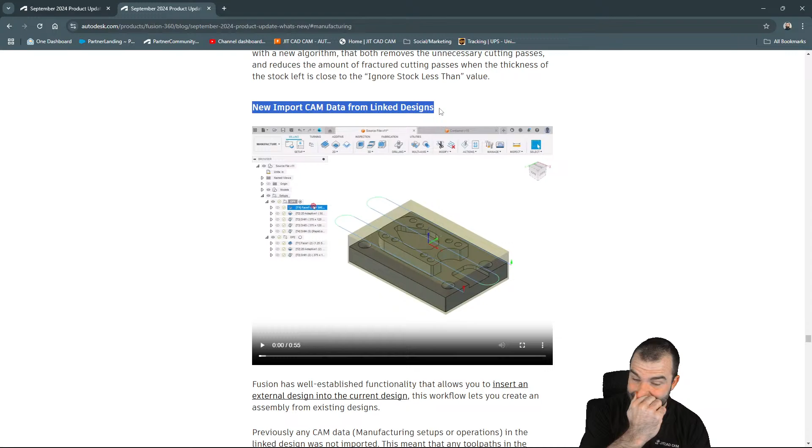So in the September 2024 update, which I'm shocked nobody has reached out to me about, down here there's a brand new feature allowing you to actually bring your CAM data from a linked design into your file to be able to use. So this is definitely something that's kind of shocking to me. And for those of you like me that are doing jigs and fixtures and pallet work and stuff like this, this is going to be amazing, right? Like, how many times have we seen it?

I think they have an example here in this video where you want to run multiple parts around a tombstone or around a jig, your fixtures, all of your modeling. You can now bring that through automatically from what I'm seeing. And I did see this, which is kind of funny, when I was messing around with that other part, when we were just talking about the container method: with that linked design coming in, we saw that CAM data come through automatically.

Now, seeing how this is new, and I have yet to read through the instructions, I'm curious to see what it would take for it to come into Fusion and what it takes to actually define it in our model. So I'm curious, does this have to come from a linked part directly? And does it automatically import? If any of you guys know, feel free to chime in down below as to what causes that, or if you guys even knew that. Or maybe we should have a watch party to actually review that video, right?

So it looks like, from what I'm seeing, they're placing their part. Go into manufacture, import CAM data. So they said yes, and it looks like it prompted them. Go ahead and review this one more time. We're all learning something new today. Let's see what happens. Let's watch this one more time, see what they're doing. Just want to make sure there's nothing that we're missing. So it looks like upon placing your part and jumping from one to the other, it's automatically prompting. So let's see if we can get it to do it again.

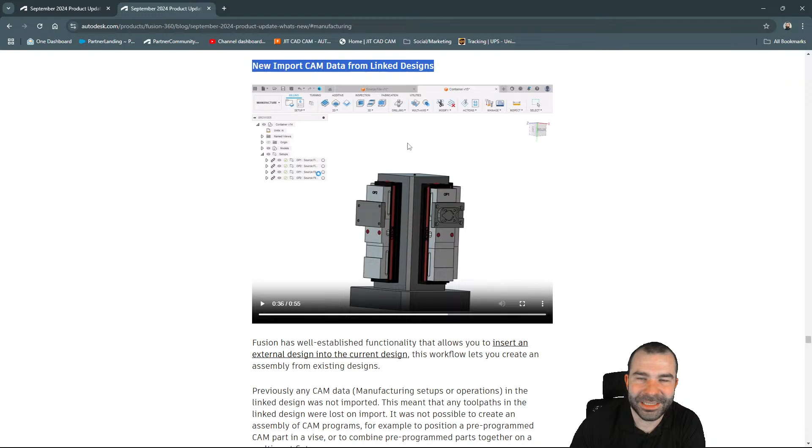I mean, that kind of freaked me out there for a minute. Let's start with that blank file again. So if we go to any one of our parts we're working on, let's jump back and we will pull the free support Friday. I guess yours truly just figured out what he's going to do for a Workflow Wednesday video. So let's save this. We have all of these tool paths linked to the part. And let's just go ahead and dump this part right in here. There's our part.

There it is. Look at that. Who would have guessed? Did you guys know this? Let me know in chat if you guys knew this. This is super cool. So now you can actually build out true pallets with multiple different parts all in real time. And what you're seeing is those tool paths coming from our original file. So Matt Van Loo, if you're out there, this is probably going to be your best friend on that big old horizontal, now seeing that you can actually link your parts and your toolpaths through.

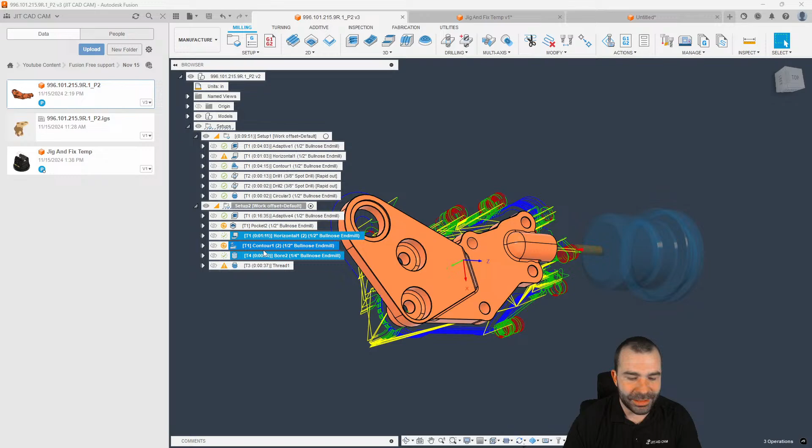And let's see if we can break it. So if we go back here and let's say we get rid of a couple of things, and we hit save, we should, strong should, get that update to pull automatically through. And we are. This is awesome.

There we go. So it works pretty clean, like everything in the design side with linking your files. I don't see any of you guys telling me that you knew this, so I'm going to take that for a fact that you guys had no idea that was in there or doing what it was supposed to do. Man, you learn something new every day. Maybe we should go look at the other what's new here. Granted, there's probably another one about to come out, right?

So, from the manufacturer side of things, right? Neil, did you know that? I had no idea, man. Let's find out what other things that yours truly.

Machine avoid tool paths. We knew about that. Improved left to right workflow. This was one that a lot of people sent me hate mail on. Of course, now you pick multi-axis as the second tab. If you all call me and I'm ever trying to tell you how to do a tool path, if I tell you it's the 4th tab, it's now the 5th tab, okay? Just know you got a +1 everything.

Undercuts and 3D contour. That's always been nice. Unnecessary cuts and 3D adaptive clearing. Well, we're not going to talk about that one. I think we've done enough damage to 3D adaptive clearing today. Spun profile, improved calculation. Oh, this was one I wanted to show you guys. This was a good one. Have you guys ever had that when you're doing lathe work and for some reason it just will not give you a spun profile or errors out your toolpath?

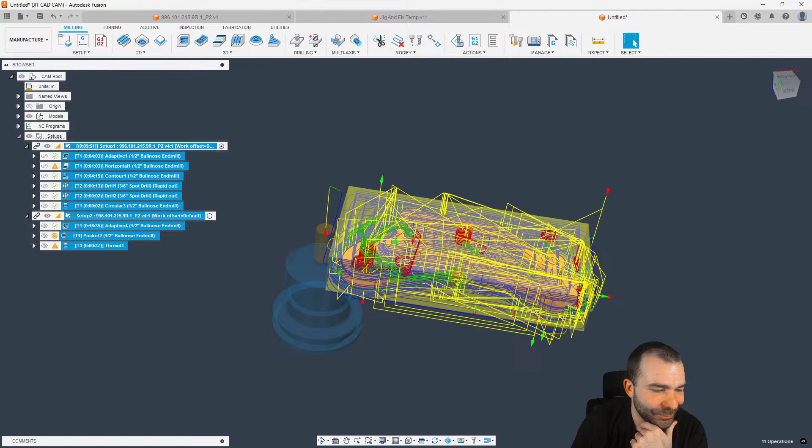Yeah, the container method works good by all means. And now it's got my gears turning on how you could set up really intricate different setups and different machine configurations to bring your parts through. Because in the world of how this works, now I'm really curious. How does minimize tool change work with multiple parts in here? Let's go for it. What?

Yeah, you got me, Matt. Oh, you're in the Netherlands, 9:30 at night. Ah, I see. Matt, why didn't you tell me about this, man? Usually you're the first one to complain to me about some problem or issue with it. How far have you pushed it, Matt? Let us know in chat.

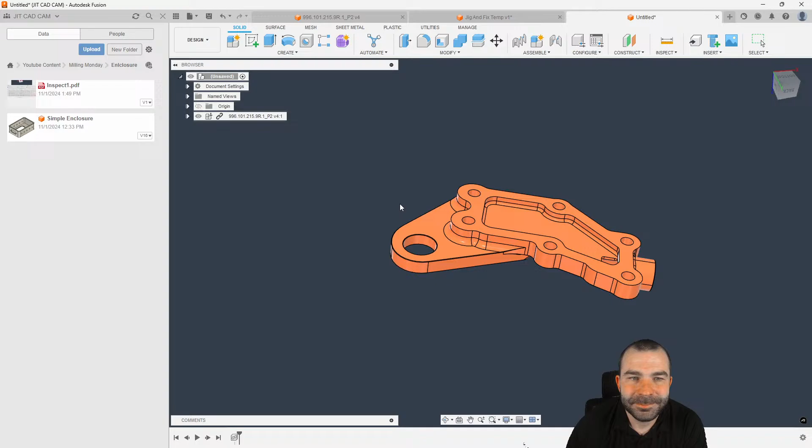So cool. Now, can you post all of this? Obviously, you could post all of it, but can you reorder all of it? Or is it going to ignore? Guess you got to use the same tools on a lot of this stuff. All right, let's go break some things. Now I'm intrigued.

I may be able to do that for you, Neil. Come up with a right angle head video.

I don't know. That's a good question, Roy. We could try it. Let's file save as this. Simple enclosure, save, and then can you give me another one? Let's say we get rid of this. Dump everything. File, save as.

All right. I don't know where that's saving. So this is going to be a good day. All right, where are we saving this stuff to? In November 15. All right, that's probably why it didn't show up over here on the left. Let's do it. Go back into design. Get back to our Free Support Friday, November 15th folder. Of course, now we got 2 of these.

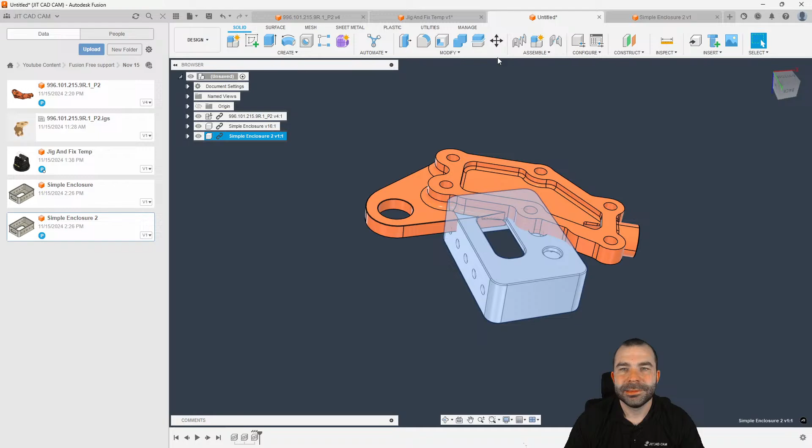See here. I mean, I don't. Is it going to prompt it? I guess we just brought in. No, so it doesn't do anything if you don't have any tool paths. All right, hold on, though. There's 2 parts in here. Let's do this. Components, move this guy. Let's shift 1 left, 1 right.

Okay. Now, if we go into manufacture, we're going to learn today. There's a setup, right? And let's hit. Now that there's a setup, yeah. So it looks like it's going to pull through that update. Yeah, so now there's a setup there. That's awesome. Now the gears are turning, because now I'm curious how this works out.

You could bring your setups through, but now the real fun is how do you go about machine simulation? Matt, do you know anything about that yet or not? That's my real curiosity. All right, let's see here. Because now you can actually put them all on something. Here's that. Let's grab a couple tool paths from here so we're using the same tools.

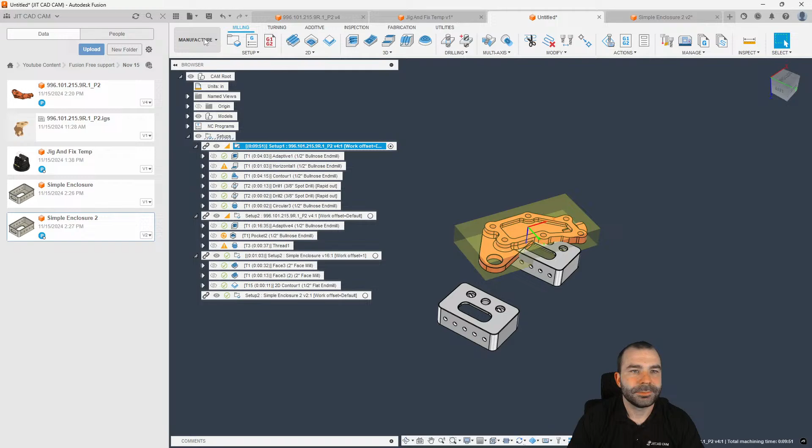And for the sake of this, I'm going to remove this one. We don't need this. Actually, with the good old-fashioned delete, right? Now, if we go back, bring the latest one through. Yeah, like you're saying, I don't know if they've meant for it to be at the level that I'm pushing it already, but my curiosity is, now that we're using tool 1 a ton, let's say we want to post everything and I want to reorder.

Holy cow, it is reordering as best it can. It moved all the tool 1s up. That's crazy. It's almost there. Who knows, man? All right. Let's do this. Whether or not I have a Kurt vise in here. Let's see. Jigs and fixtures. I think I have a whole area dedicated. Where is he? Random parts, machine sim. No, it's got to be under content, right?

There's that jig and fixture. Well, let's Kurt. Come on, Kurt vise, where you at? Might have to fix it here, but we're gonna see what happens today. We're gonna learn today. Back to design. Just to be safe, let's just go ahead and scrap all of this. Fine. Don't need the dummy part in here. There we go.

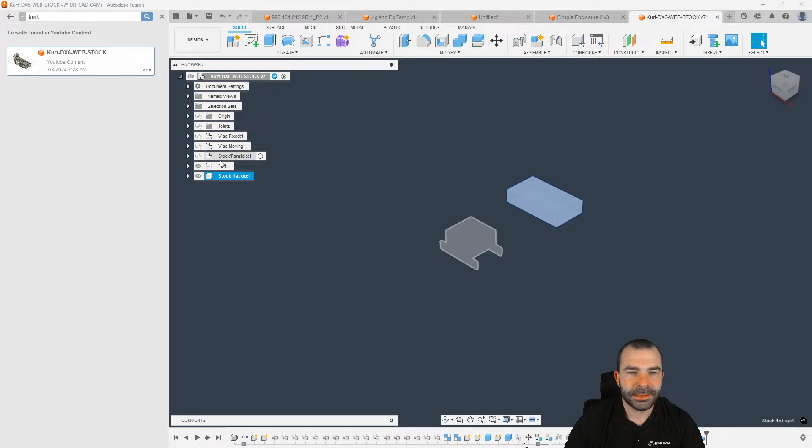And stock. I think that's different stock. What is this guy floating around out here? We don't need that. What all do we have? Like I broke my model at some point. I feel like we talked about this 2 weeks ago when I broke this, but what I want is basically what we have here. Okay, cool. So let's save that. Now let's build our tombstone.

New component. To make Fusion happy, we're going to do things right. Let's see. Equal. Full. Go.

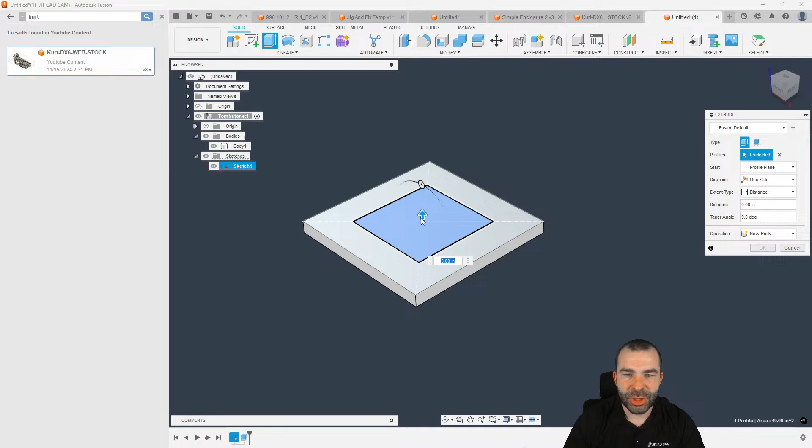You guys did this to me. Y'all ain't got questions. You're the ones that started this. I'm blaming it on you.

All right, there we go. Got our tombstone. I would like to bring in my vise now. Hold on here. Let's get the vise out of there. I activated the top level. Now bring our vise in. Boom. Moving too fast for my own good. All right, so we got a vise. That guy's grounded, so we should be good there. Our joint.

Boom. And let's say we are going to copy, paste another one. Boom. Now we got two. We're going places, guys. And presumably we would need our part. Other component. We're going all out this time.

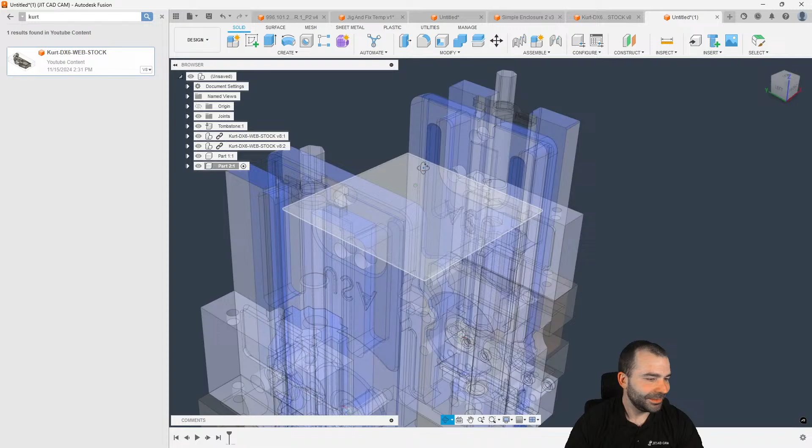Window machining part. You missed it. Last week we talked about the whole window machining. We could do another one. We did tabs earlier too. I don't know if you caught it or not.

I like how when I just start screwing around with stuff like this, you guys get all quiet, you stop talking in chat, and then you turn around and double the viewers come in. Like you guys just enjoy watching me completely screw things up.

All right, let's see what we got here. Let's start with the container method. We're going to manufacture. Of course, you're going to ask me that because there's tool paths tied to the vises. Let's do it again. You only get one shot, apparently, to bring through those tool paths. All right, let's do this. Back to our vise. Wait a minute. There are no tool paths on our vise. That doesn't make sense. Huh.

Alrighty. Let's try this. Manufacture. Setup. Well, no, it's not going to use the setup, is it? Huh. Now I'm curious how this is supposed to work out. All right, let's just go for it. Back to manufacture, back to design. Let's go out and grab a part. Let's put Friday.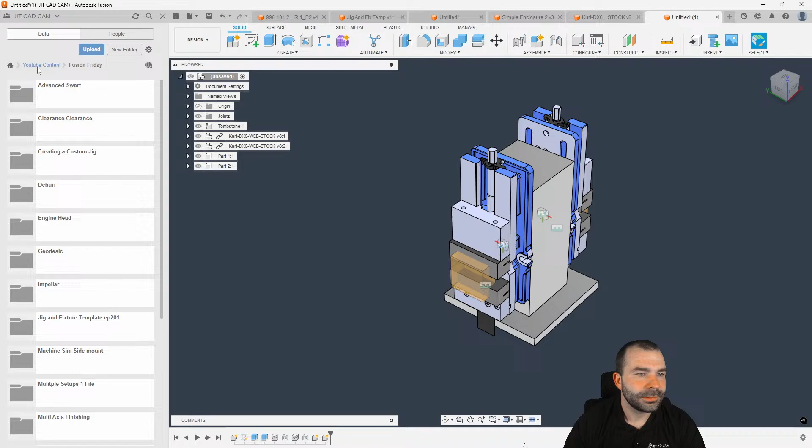Let's use the part we've been using all day, right? Okay, here's our part. Bring this guy in. And we're now going to do point, bottom center-ish. Flip it in a little bit. And we need a second version of this. Here, their joint. I don't know how well this is going to work, but we're going to find out.

Kind of ignoring you guys in chat. You guys have any other questions in the meantime? For those of you watching this over the weekend, getting a good laugh out of it, I hope you're enjoying your beer.

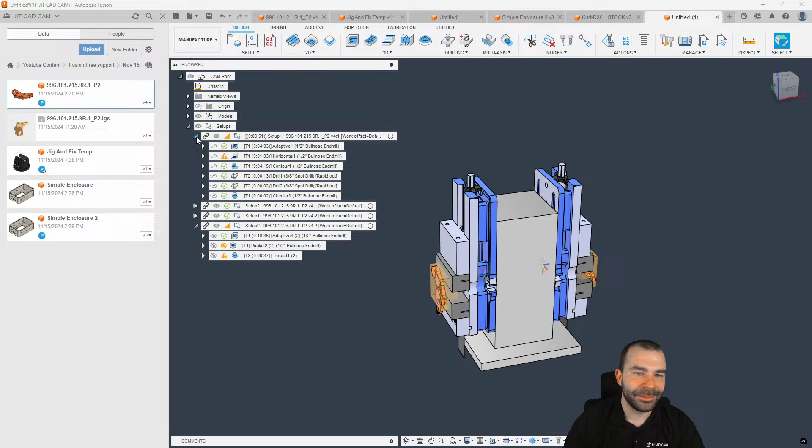That's how they did it. They just went in and they were like, you know what? We're going to take these two guys and suppress it. And now that it's suppressed, that kind of makes sense. But if you were to post everything out, yeah, so it's only giving you everything but what's suppressed.

No, it's me trying to figure it out on my own. Cosmin, do you have an article or something I can look at and get a good laugh out of?

Hey, I just learned. I thought I was showing something that I shouldn't be showing when all of a sudden my linked toolpaths come rolling through. All those years of telling people that you should keep your original part linked because all those toolpaths come in here. I'm just checking out how it goes. Now, I think 100% somebody pointed it out about the WCS. The WCS is going to be key here. How is it figuring? Because you do have your setups here, but you can't really change anything or your tool orientation. It's kind of like one and done.

Hey, I've gone to the forum a couple of times with certain problems, man. I had a brand new Haas machine, and it was ahead of what some of the stuff in the background of Fusion was going on.

But yeah, I get the idea. I see it starting to come through, but I guess your tool orientation is still there, other than yours truly put his parts in backwards. But I guess when you post that out, we'll switch out post processors. Yeah, see, all the problems are going to come now from the fact that your parts are like opposite facing and everything, right?

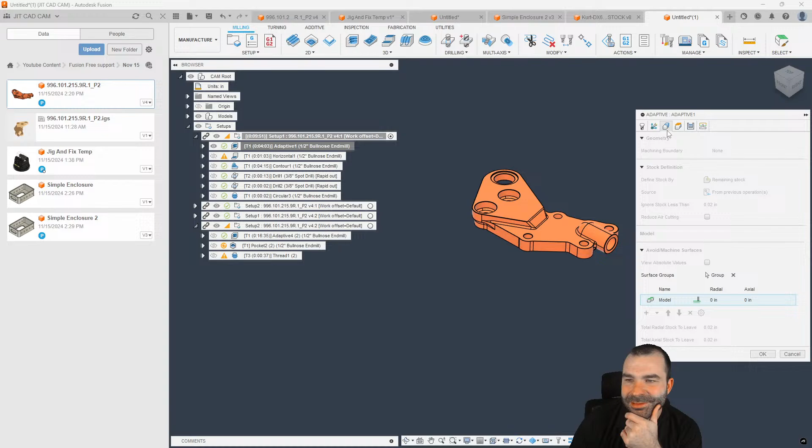Can you edit toolpath? Oh, you can't edit tool. Oh, no. You can almost do it. So close. So close. Man. I'm curious to see where this goes.

Osman, you got any questions out there? Matt, are you still out there? You tell me, is this how far you got, or have you got it to work better than this? Because I could see the vision. What I can't see is the fact that obviously when we're bringing in these parts and placing them in design, that we still have to be very self-conscious about what is our WCS orientation, how is our part sitting square to everything. I think they did a little smoke and mirrors on that when they showed it. It's cool though. I mean, heck, this is light years ahead of what we had for the idea of like tombstone machining for sure.

Oh, I was going to show you guys something else on this part real quick. I don't know. That's a good question. I mean, we could try it. Let's see. So if you go back to design, let's just break the link on one of these, right? By breaking the link, what happens in manufacture? Yeah, I mean, you're not wrong. It brought through the toolpaths. You have full control, but the issue I foresee is you're no longer linked, which kind of sucks if you're going to go back and program this different.

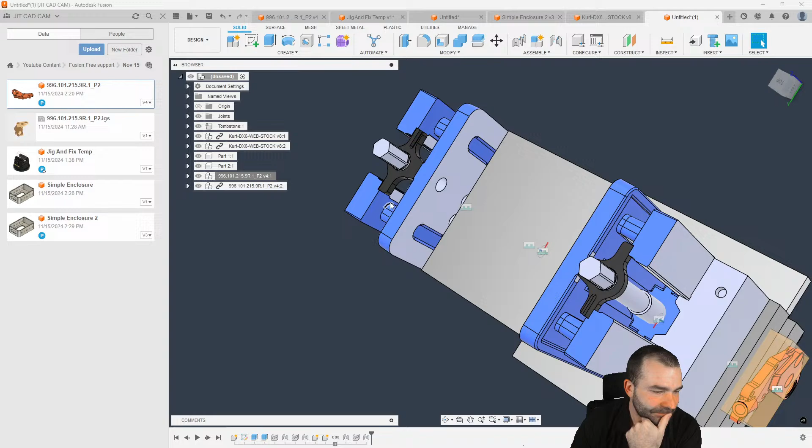Yeah, I mean, I don't know if you could turn it on or turn it off or leave it as is, but from what I'm seeing, this is super neat. Like you have full freedom to take a part like we're doing here and program it all up individually, right? And for you guys to know, I did not plan for this to happen. We're going from a 3D printed prototype to now an actual billet piece of aluminum to put on the car to test fit it.

Now we've done that, probably on the oldest dinosaur of a machine in your shop. And now, transitioning into the idea of jumping into tombstones and mass production, it's super valuable to automatically pull this stuff through and get it all set up and defined. So I can see where that's cool that you can bring in your part, break the link, and then have an awesome starting point. And then you're right, you would just have to go through and redefine everything.

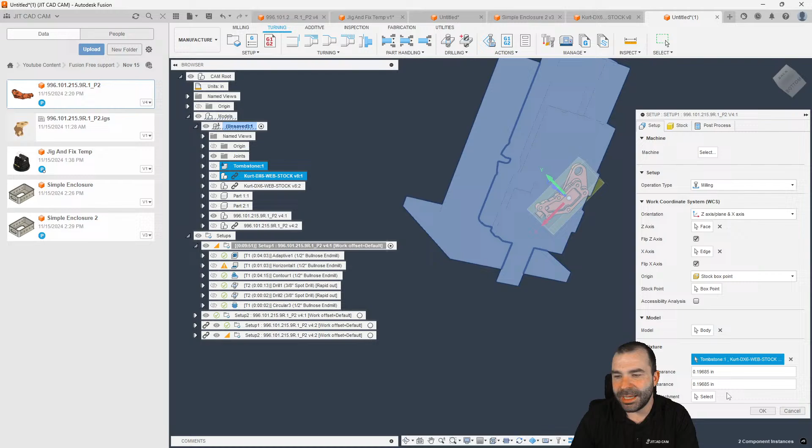So we've already kind of done this, right? So you have your tombstone, and then we also want our Kurt vise and yada, yada, yada. So now it's like, boom, there's one side of the part. And then on our other setup, same thing. I'm curious, is continuous rest machining going to work? No, see, that's the thing. Your continuous rest machining is being driven from that other setup that we have suppressed. So this is wild. You can't edit your tool path that's linked, but you can regenerate it.

But yeah, I see where it's coming from for sure. But now you're going to get into that danger, right? So let's say we break the link on this, and I'm probably going to get a terrible phone call this weekend. All right. So now that you've done that, does your continuous rest machining still work even though you've suppressed everything? For the most part, it looks like it's going to.

Oh, see, it's going all the way down and around the part because it doesn't know what it's doing prior. So you almost have to freeze it as a place in time. Because without the proper information, it's just not going to know what it wants you to do, right? Actually, that's our pocket clearing path. Hold on here. Let's get rid of that. No, pocket clearing's doing the same thing.

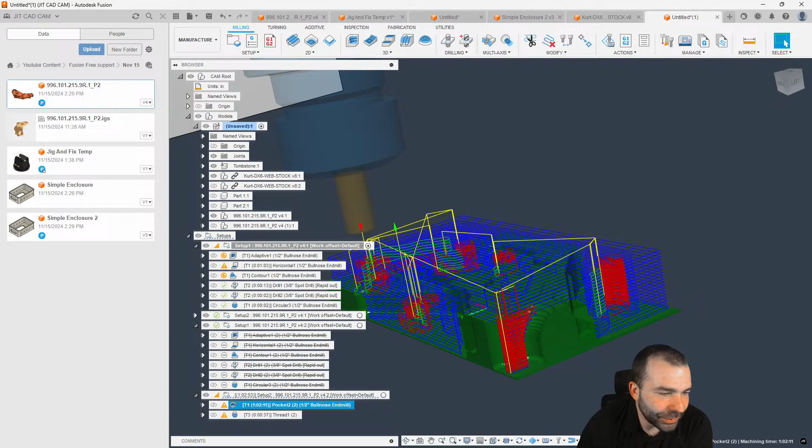So like we thought. I see more messages coming in. All right, what do we got for messages? So we broke the link. You do have full control over the tool paths after breaking the link, but now I'm just seeing some craziness. Well, technically, in this scenario, we would have the same part in two locations. You're almost better off carrying on. Yeah, oh man, it's just so close, but so far.

Basically, you would use this setup to trigger the other setup, and it gets kind of messy in the full deployment of this thing, right? I'm going to jump back to design because it's easier to see it. Because of your continuous rest machining, and we brought this part in, we got double the setups, double the things, right? So, awesome.

Osman, I see your question. So you have a homemade CNC lathe for wood, and most of your issues revolve around dealing with the limitations. Oh, you use GRBL on it. That's awesome. And Arduino, that's pretty neat, man.

So, yeah, I don't know if you can turn the import off. I didn't see anything when I skimmed through all my settings, and I'm not going to pull my settings back up because there is stuff in there I know I can't show. But, yeah. You could use it as a quick toolpath library import. That's true.

Can you use REST machining to create? Yeah, so that's the problem. So what I'm thinking and what I'm seeing is, when we broke those links to try to make this real world, we actually triggered more problems, because the suppressed toolpaths are now almost causing the issues that we're seeing.

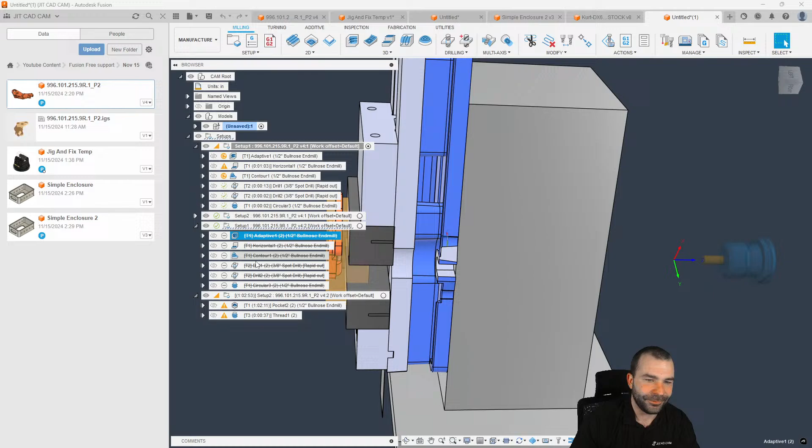So if I unsuppress this, right? And this is just throwing ideas out there. So now we've got all of our toolpaths here to machine it. We've got some other weird stuff going on out there.

Okay. Yeah, I don't know what that guy is doing. That guy is lost. What are you looking at there, little guy?

But yeah, now that we have that REST machining stock here, our pocket clearing would pick up on REST machining back the other way, right? As you see, we're not machining all the way down the part, as we've discussed. But the real problem is if you went in and said suppress this whole thing, notice how it's causing me to do a regeneration down here. And that regen immediately dumps everything, right?

So you would almost have to just hide everything one way or another, right? So you could just have this linger, and then presumably, and this is where everything gets kind of funny, I would take this setup up here, right? So now this setup is technically my second part, and it's being driven from my first setup down here. So to clean this up, this is setup...

Let's label these better, right? So this is setup 1A. This would be technically setup 2A, right? And then you have setup 2. And then this would be setup 2B, because setup 1A is down here. That makes sense to any of you guys? Makes sense to me, right?

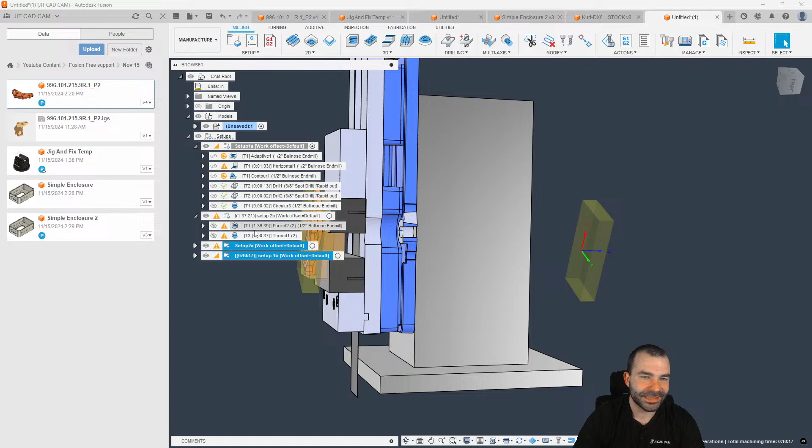So now you have these two setups down here just lingering that have no purpose, but you need them because you have your REST machining coming through. And what's really going to screw you here is, oh, I've changed blank, blank, and blank here in setup 1A. Well, that has to also be reflected in setup 1B, right? So you're kind of damned if you do, damned if you don't.

There's no real good way right now to really use it. If you make your part square to the world, I think you have some leeway. And then, again, going back to my video on Wednesday when we talked about not having DWO or TCP, you almost have to have it for the way they're coordinating this. Unless you can mass shift everything. Yeah, you're 100% right.

Crashed files are never good, right, John? And it does, it creates a huge number of duplicate setups with different versions. I know somebody asked me the other day, hey, why don't you ever use manufacturing models? And it's the same kind of dilemma. I don't know how many of you have ever seen this. Let's say we go back to this part, right? Let's just use the simple enclosure.

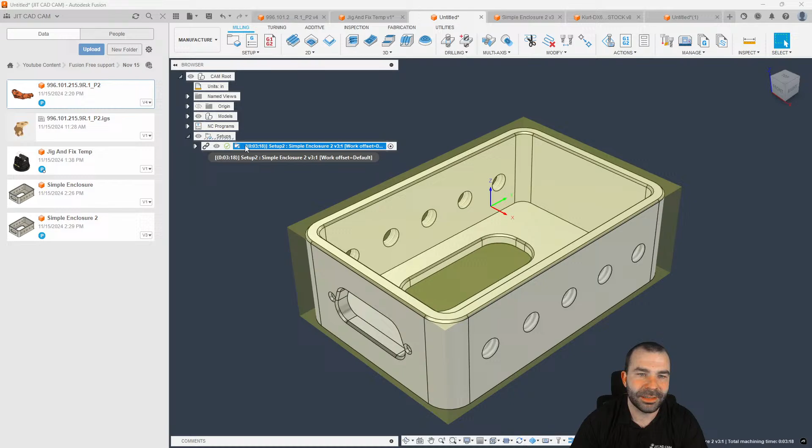If you use manufacturing models, the problem with a manufacturing model in a brand new setup, can you take this out of here? No, you can't even get rid of it. That kind of sucks. So let's say we do a setup here and I want to use a manufacturing model. Upon creating my manufacturing model, I actually create a second set of bodies, which a lot of people don't understand.

So now that we have a manufacturing model for this particular thing, yeah, I can insert components and modify things. The real problem lies in the fact that by selecting manufacturing model, I have actually forfeited my body. So I can't have my body carry through into my second setup for REST machining. So you kind of lose something there as well. It's super weird, at the end of the day, the way they're doing all of this.

Because here's my first setup, as you guys saw. I'm using manufacturing model 1. Let's say I go in and create a manufacturing model again for my second setup, and now I create a new setup using manufacturing model 2. Although it's picking a body, notice how it's picking a body out of this model, right? So if you go in and say from preceding setup, continuous REST machining, I get this error because it can't transfer across manufacturing models, right? Super weird.

Oh, yeah, and you're right. I mean, Deep Thinker, I see the way you're thinking, and I've kind of thought about that too, is like, we caused a lot of fucking chaos here. Excuse my language, but when you go in and you post all this out, you would have to go through.

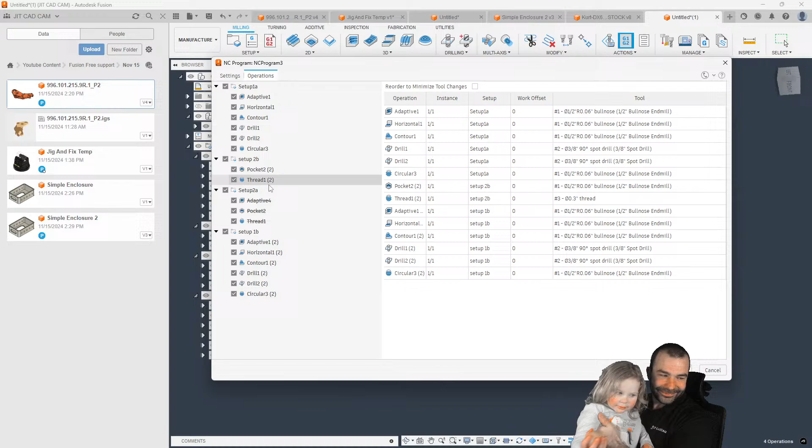Oh, you guys didn't know it's my daughter's 3rd birthday as she's coming up here. Leona, do you want to say hi? Yeah, today's your birthday. You want to say hi to everybody? Here's your future of jitcadcam. Say hi. Hi. Show them your egg. Yeah. Happy birthday. Everybody's saying happy birthday to you.

So, you're not wrong as you're thinking. As I would think the same thing, is you would have to come in here and, like you're saying, toggle off your setups at this point, but you would still need those toolpaths to trigger the models. So it's kind of one of those things that you're damned if you do, you're damned if you don't. I can see the vision and I like the vision, Autodesk, by all means. It's close, but it's still missing that, like, I want to import for this model, this setup, right?

And I think a lot of you guys will agree, the idea would be, when it gives me that prompt, it should prompt me what setup I want to tie to that model, right? That would be the way to go. I think that would be tenfold there.